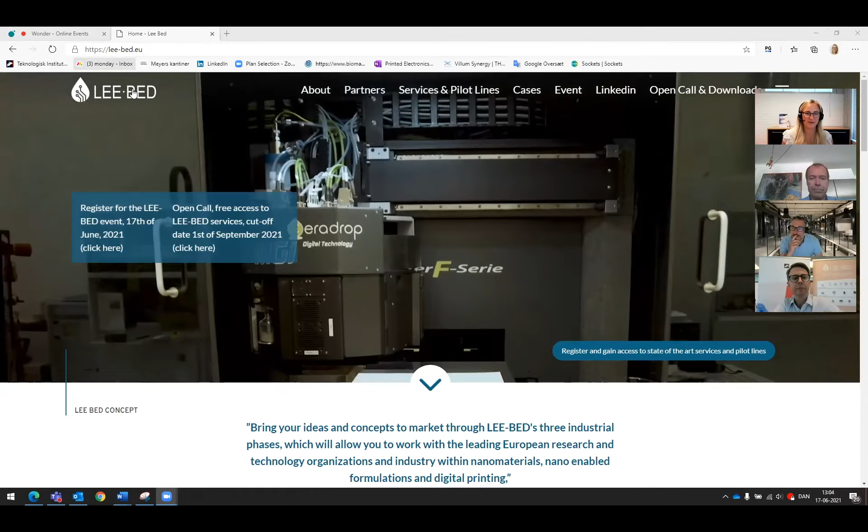You have probably been in here to register for the event. But if you would like to gain access to the LEE-BED service, the only thing you have to do is go here to the front page. Then you can register over here by this box, register and gain access to state-of-the-art services. Click here. And then there is this registration form you have to fill out: your contact name, the company, your mail address, and a short description of your idea.

Then there is 4 more steps: how mature your idea is, what you wish to accomplish with the help of the LEE-BED support, and how big your company is. You are also able to upload a file here, and simply submit. Then we'll come back to you.

I know that Zachary Davis in his talk will also come into further detail what you can gain from this service. Another thing I also want to mention is we're gonna have these networking sessions.

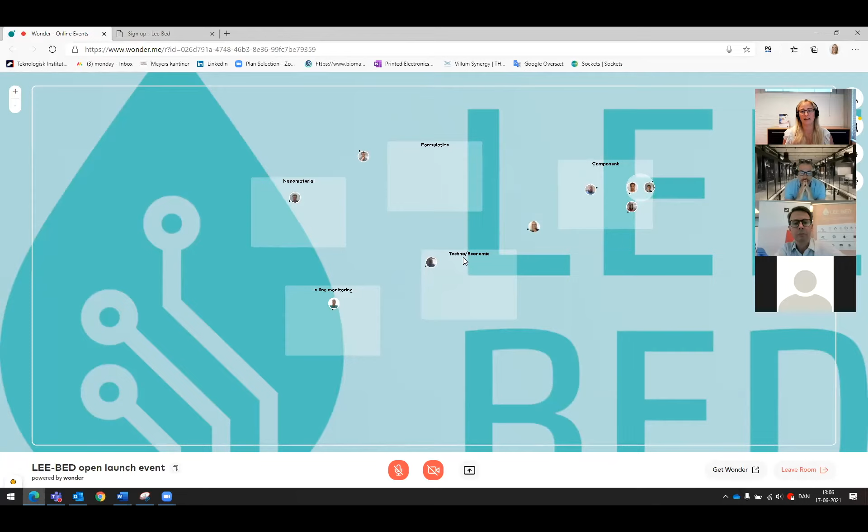When you enter this, you'll be asked which company you're from. Just type in your company name and access. Then you will see a table like this. You can zoom in and out here to see anything further. We have 5 areas where experts from this area will be able to answer your question and network with you: nanomaterials, formulations, component, line monitoring, and techno and economical services.

If you want to speak with a specific person, you can go over here and, for example, find a specific person in the participant list. Then the screen lights up and I can find Christian here, for example. Then I can go over to him or invite him to my circle. And a ring forms around and we can start to chat.

Hi Christian, you can maximum be 15 people in a circle. So if you go over in one of these areas and the circle is already full, an expert will enter your circle and start a conversation with you. So don't worry about that.

You don't have to be inside one of these 5 areas to have a conversation, but the experts in these specific 5 areas will be in these areas. If you go to the bottom of the screen, you can turn on your microphone and your camera. And if you go to the right side, you can change your audio input and your video input as well as your name.

You can also chat with people in this networking. You can chat with the people in your circle, send a private message, or write to everyone. We have 3 networking sessions: one after the first talk, then another one after the second and third talk, and then one at the end.

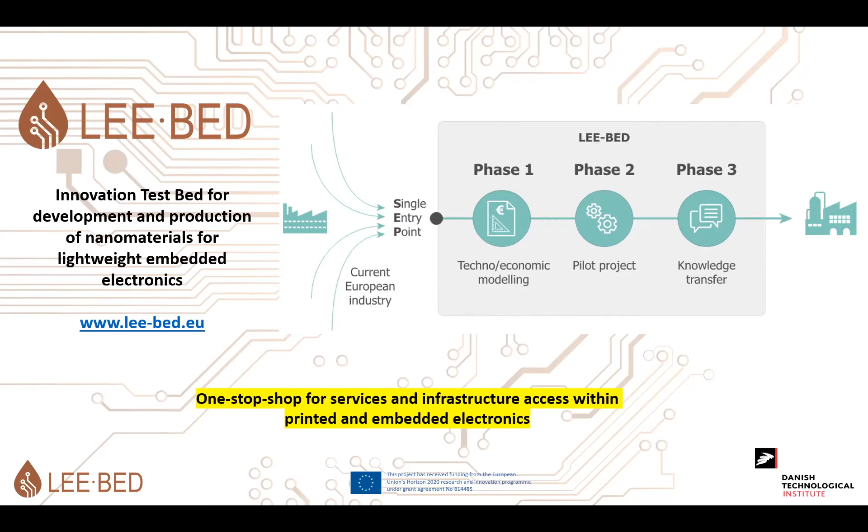It's actually quite a few partners, as you see here. We have 13 service and pilot line providers spread across Europe, in quite a few countries, and you can see them here.

I also want to emphasize the pilot projects, or the types of pilot projects. We have many different types of pilot line technologies: nanomaterials, formulations, component printing lines, of course. We also have a lot of inline characterization and testing facilities in order to understand what we're doing, because it gives feedback to the different pilot lines, etc.

This requires a lot of organization, but this is what LEE-BED has done. In order to facilitate the development of the services and the upgrading of the pilot lines that we've been performing over the last 2.5 years, we have 4 end user cases.

We have Swarovski, Maier, Graphiatic, and Axion. I'm not going to say much, because they're going to come and tell you themselves what they are doing, what they're interested in, and how LEE-BED has assisted them in their development and innovation process.

So just a little bit about the LEE-BED journey. You go to the website and push the button. But what happens after that?

Well, in principle, the LEE-BED services work such that most of the contact goes through the single entry point, which is DTI, which is us, and also a project manager. The project manager gets assigned to you shortly after you come into the single entry point.

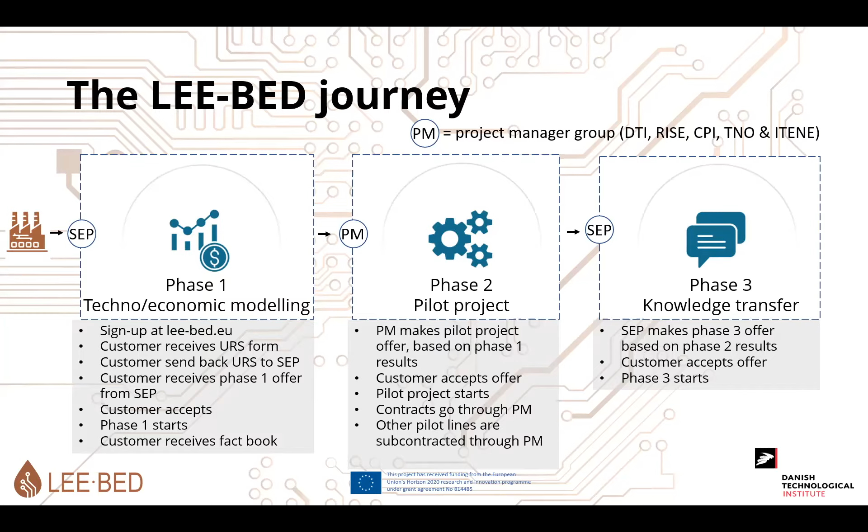The phase 1 services, to go into more detail, we have 6 services. Technical assessment, which is mandatory, because we need to understand what the customer wants to do, what the technology readiness level is, and what the ambition of the customer is. Once that's finished, there are several other services we can do: safety, economic, LCA, patent mapping, and if needed, pilot project financial support.

Pilot project financial support - I'm not going into too much detail, but this is a service for small companies or SMEs that don't have much capital, because using the pilot lines you're going to see, they're not inexpensive. So if you need help getting support for that, we can help you with that. Just a short description of each of the services now.

The technical assessment looks at the technical feasibility within LEE-BED. Can the LEE-BED expertise and pilot lines provide a solution for the client? We look at the risk level - does it require inventing a whole new material system from scratch, or can we just take things off the shelf and mix and match what we have?

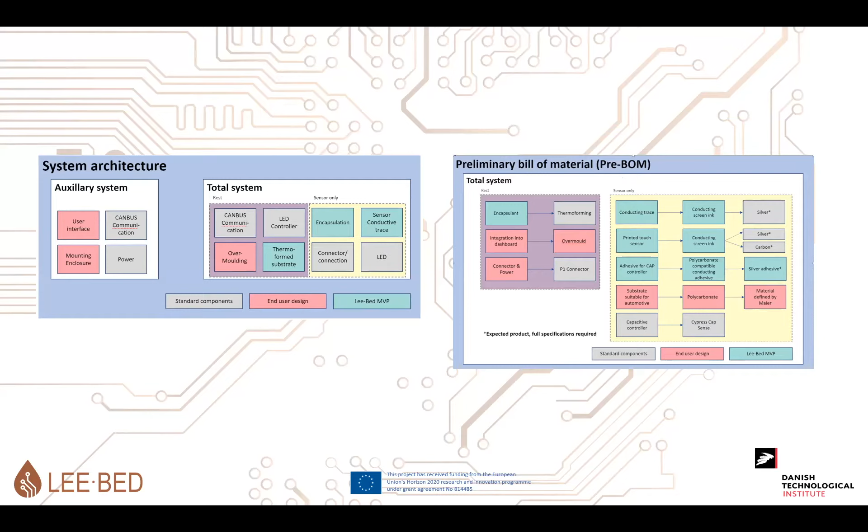Once we've done the technical assessment, we go back and use that data to carry out the other services. We can do an economic assessment, because at the end of the day, the product you envision probably has a cost target. Can we meet those cost targets, and how? We can look at both the material properties and cost, but also the production cost using different production possibilities.

These are things we can do - we can look at the risk involved, and we can also develop a preliminary business model canvas, etc. So this is something we can do as well, because it's not just about looking at the technical solution, which is important. Sometimes we also need to understand how much it's going to cost, and what the cost of the product or innovation will be at the end of the day.

Preliminary safety screening is also quite important. We need to understand if there are any risks, because in many cases we're talking about printed materials which consist of nanomaterials. So we need to look at the regulatory aspects of those materials embedded into the printed product. We have TNO, experts in this area, who are really good at doing toxicological and ecotoxicological testing. We can also go a step further and look at the electronic components themselves - there's a lot of standards in the mechanical and environmental properties of these things as well, so we can take a look at that.

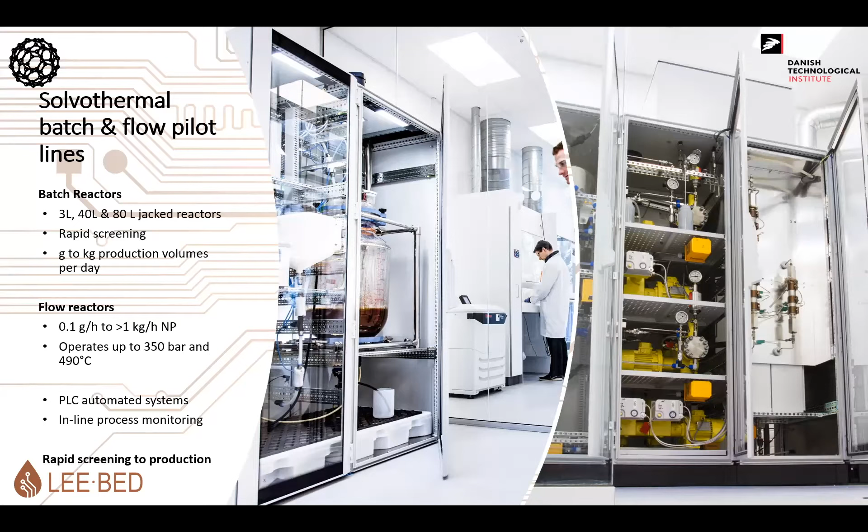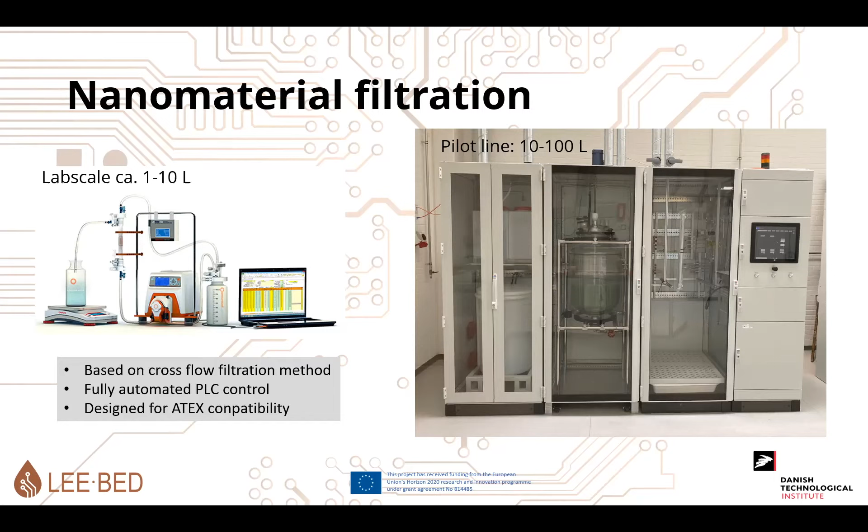Another thing we're looking at is not just the actual production, but also the filtration, because that's a huge barrier. Once you've produced, let's say, 100 kilos or 100 liters of nanomaterial suspension, you also have it together with a lot of byproducts that you need to clean. Cleaning 10 liters you can do with a centrifuge, but cleaning hundreds and hundreds of liters in a production facility is quite tedious and time consuming. So what we've done is taken what we call cross flow filtration, a bench lab scale unit doing this type of thing, and upscaled it to a production level tool. This is something we just finished - I took this image yesterday, and we're testing it now. We plan to validate the process within the next couple of weeks.

Some of the materials we've been working with: copper, silver nanoparticles, silver nanowires. I didn't have a picture, but we just had a breakthrough being able to also produce copper nanowires now, so this is quite exciting news for us. We're at the very beginning of this, but we're trying to review this discovery. We're looking into hybrid materials - carbon with metallic embedded particles, dielectric materials, ferrite and magnetic materials, oxides, ceramics, etc. We can do quite a large variety of materials.

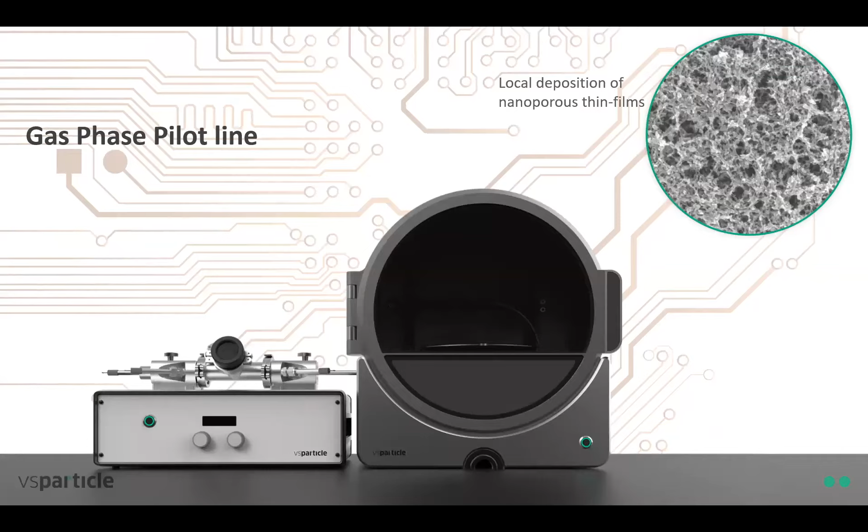We also have another pilot line, made through our partner VSParticle, looking at a gas phase nanomaterial pilot line. Basically, it uses a spark ablation process, which is able to take a bulk material, or more than one bulk material, using spark ablation to aerosolize or make small nanoparticles, and then a flow system, an airflow system, to carry the particles and deposit them onto a surface. In this case, what you get is a local deposition of your particles onto a substrate in any pattern you see fit.

This is very interesting, and these are used for sensor applications, gas sensing, maybe CO2 or CO gas sensing, and other interesting applications. This is just showing you how it works. The pilot line is actually up and running, so if you'd like to take a look, please contact them for more information.

If we go on to the next type of nano-enabled formulation pilot lines, we've done a lot of different things. I'm just going to give you a few highlights. One thing that's pretty interesting, and one we identified as a LEE-BED innovation, is trying to bring down development time. This is work done by CPI in the UK, combining AI and robotics to optimize the development phase of making a conductive or nanoparticle type ink.

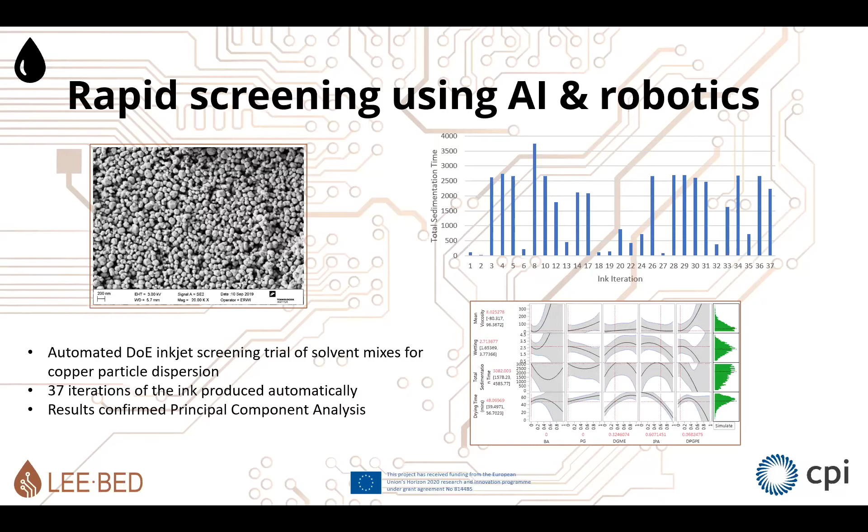What they're doing here is taking particles, in this case copper particles from one of our nanomaterial pilot lines, and conducting an experiment to find which solvents and materials are compatible with the particles. We did design of experiments and used CPI's robotic capabilities to both mix and test many different ink iterations, then compile a list of which particles are compatible with which solvents. This helps us go quicker to inks that are more stable and work, that can then be developed into real inks used in the pilot lines.

We've continued that work, and based on it, developed a few different types of inks, including an inkjettable ink, which is used by us and other partners to make some components. Copper in this case is a cheaper and much more sustainable material than silver.

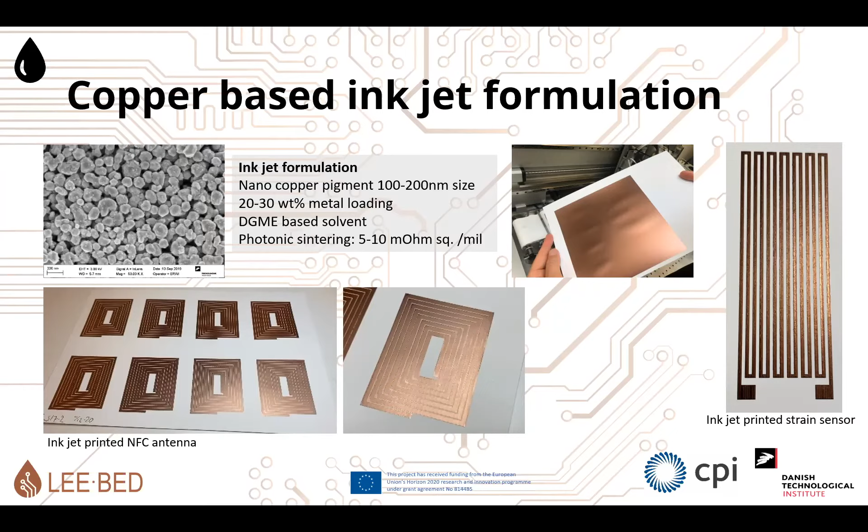We also have RISE working on zinc, which is an extremely nice material because it's quite cheap and sustainable compared to silver. They've also been able to achieve a nice, stable, conductive, inkjettable ink, and they're using it in their own pilot lines and printing lines, as you'll see in a minute. This is a very nice alternative to some of the other materials we've been developing.

We also have Athena working on different types of color-based inks. This could be interesting for packaging, for example for gas-specific indicators, or for temperature, humidity, or pH. You can use these color-based inks to give a visual indication of what's happening, which is very nice for packaging.

On top of inks, we also do other things. Formulations is a broad term, so we're also looking into adhesives, because when working with flexible plastic foils, you cannot use standard soldering technologies—soldering onto a plastic foil will just melt it. So we use conductive adhesives, or glues, which CPI is also looking into. In order to attach dies, we can develop both anisotropic and isotropic adhesives for mounting different dies, and this also ties together with some of the production pilot lines, as we'll see in a bit.

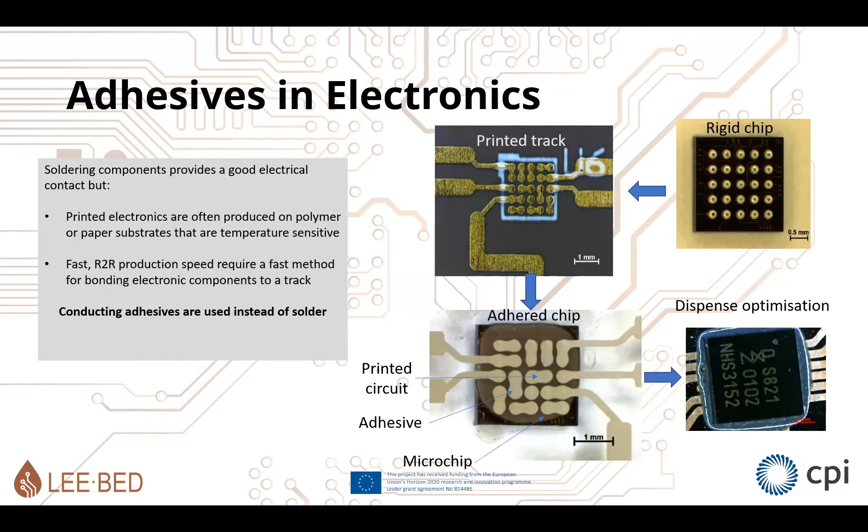We also look into nano-enabled resins, making composites with tailored functionalities based on introducing nanomaterial. This could be for EMC shielding, or for other things like antibacterial effects, and there's a lot of different applications—also thermal conductivity, this type of thing. So introducing these kinds of properties is something we're working on as well.

The last type of pilot line is these component pilot lines. In this case, we have quite a few tools to play around with. We have quite a few partners with different types of equipment, and we try to characterize them into two categories: one is prototyping and small to medium scale production, and the other is the more production-upscaling technologies where we're talking about roll-to-roll or large sheet-to-sheet equipment. So just some examples of that.

Both DTI and RISE have inkjet printing technologies and capabilities on the sheet-to-sheet level, which is very nice for testing new inks, for prototyping, for doing small scale studies, working with different materials. This is just some of the things we can do, or some of the equipment we have.

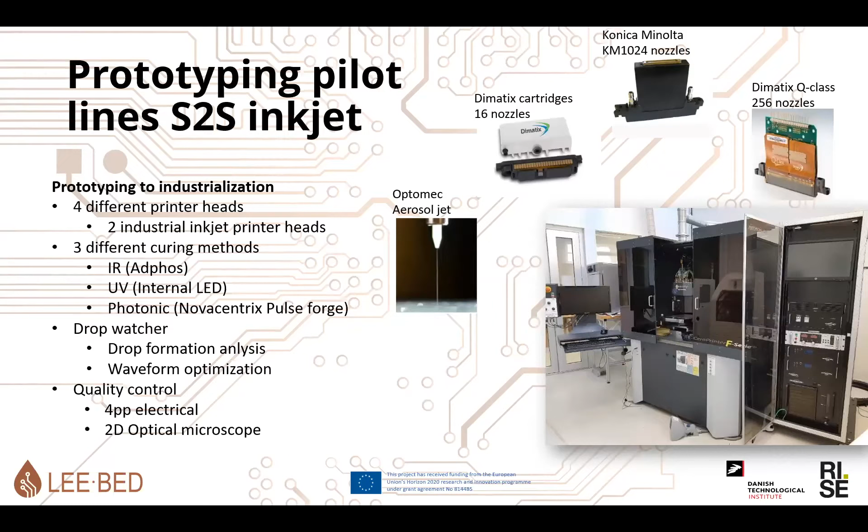This is just some examples of things you can do with this type of technology. You can print coils, touch sensors, humidity sensors, strain gauges, thermocouples, you name it, we can try to do it. You can work with different technologies, different materials, and I'd say this is very nice because you make a design, you start to print, and maybe within a few days you can start to test it, making this a very fast iterative process to optimize design, look at different materials, etc.

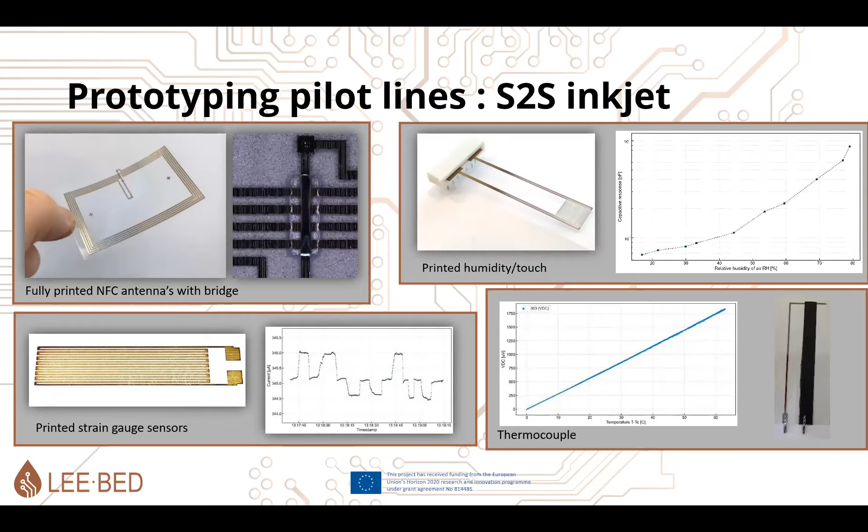Another really exciting innovation in LEE-BED is this 3D multi-material technology. This is done by TNO and Holst. It combines conventional 3D printing with also some conductive materials, etc.

This is an example where they actually use SLA printing to print cavities, and then they filled the cavities with components. Then they printed grooves and filled up the grooves with conductive, in this case silver, paste. And then they encapsulated it with the 3D printing technology. So in this case, it's a fully embedded passive temperature logging system, fully 3D printed.

And this, of course, is getting more and more mature. So in this case, you can really think about truly 3D electronics using this type of technology.

We also have these sort of more large scale or large area printing systems. These are some examples of sheet-to-sheet screen printing, where both TNO and RISE have this type of equipment. We also have RISE developing a large area roll-to-roll inkjet printing system. Basically what they're doing is converting an old poster printer to a printed electronics printing system. Extremely exciting - you can really make big areas of printed electronics on a poster format.

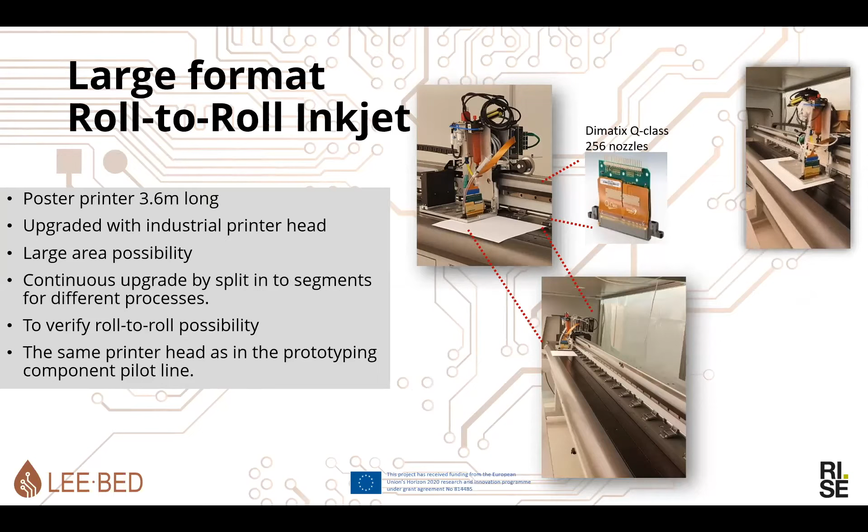This is really cool. We also have roll-to-roll technologies: flexographic, inkjet, and I think also rotary screen print. In some cases it's not written here, but we have that within the consortium. So we can really go up to industrial production volumes when we want to do that.

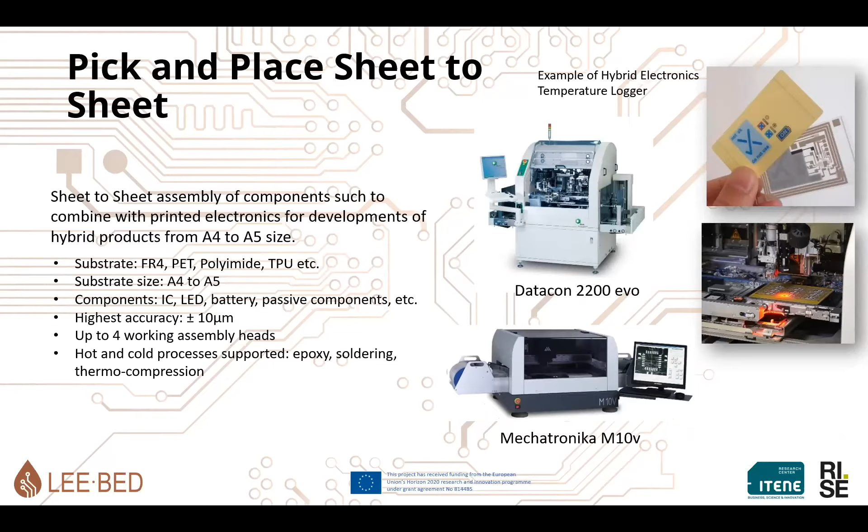Pick and place systems, of course, we have sheet-to-sheet pick and place systems. If you want to mount temperature sensors, capacitors, resistors, or microcontrollers, this is what we need. And last but not least, the big brother to that is a roll-to-roll assembly system.

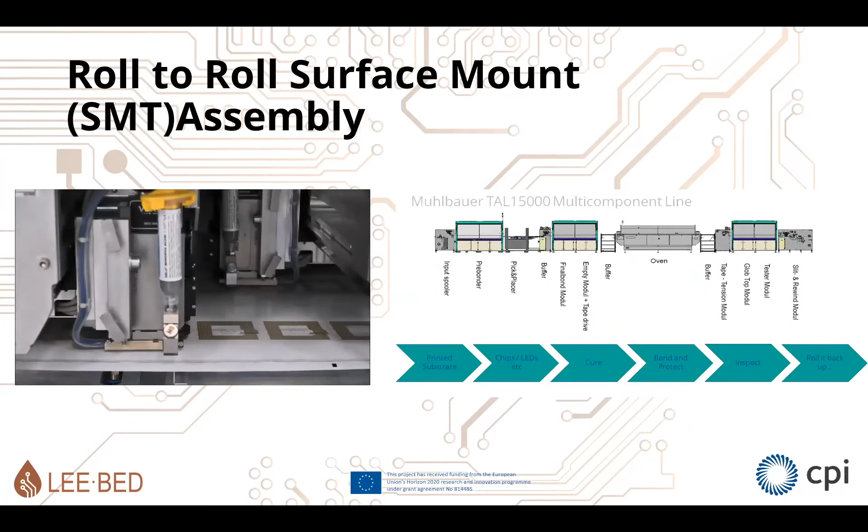This is a system that CPI has developed and has been developing for many years. This is a really interesting line - basically you can take your roll-to-roll print, put it onto the roll SMT assembly system, and then do your mounting on a roll-to-roll frame instead of a normal sheet-to-sheet process, which is what's done today. Extremely exciting technologies.

The last thing I wanted to show you is also the embedding part - actually making and printing components, but also then embedding them using resin infusion systems is also something we're looking at. If you want to do this, I think it will be more evident in some of the applications we've been doing, so I'm not going to take too much time on that. Just some examples that have been fabricated by CPI.

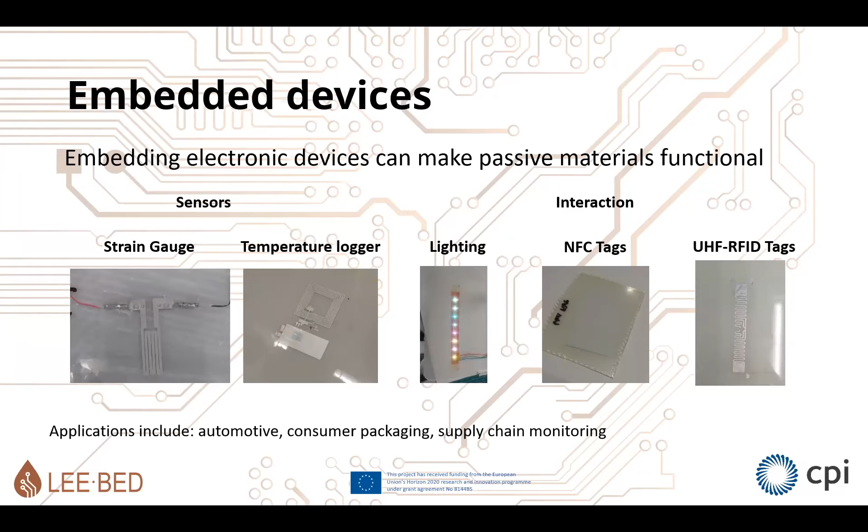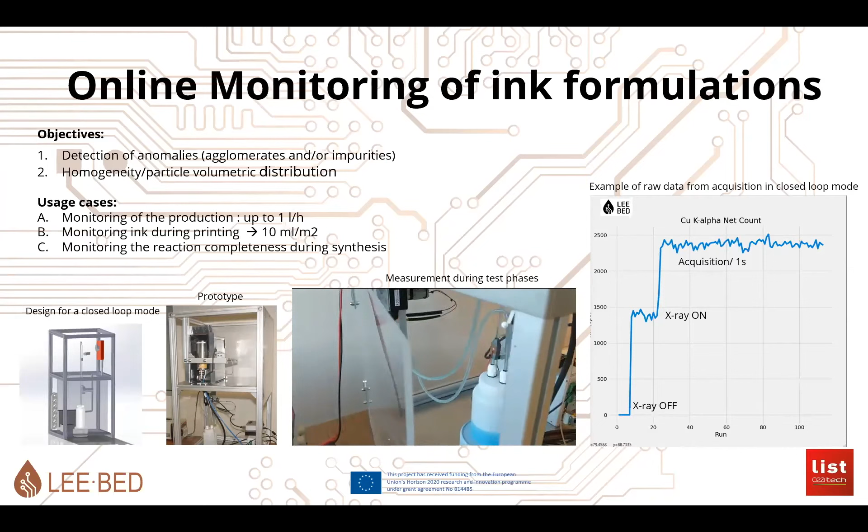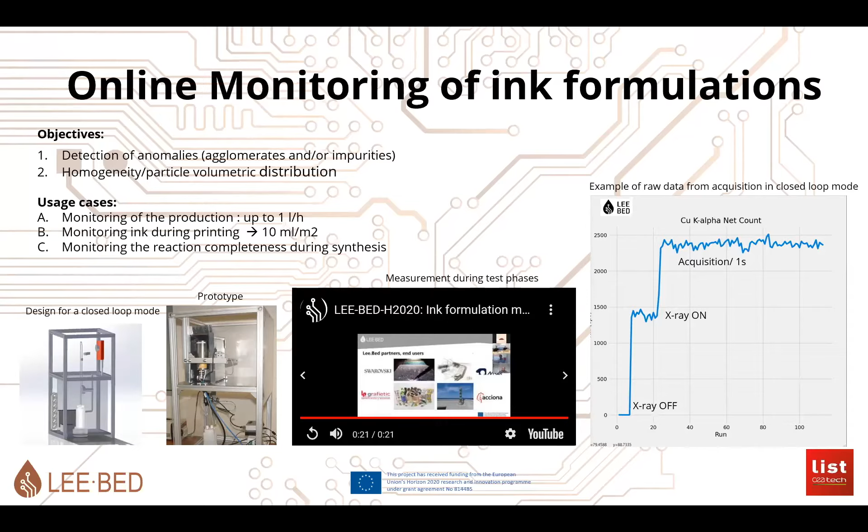I also want to mention a little bit some of the online and inline monitoring systems we've been working with. SIA List has been working on an XRF system that can act as an endpoint detection for our nanomaterial pilot line. This system can monitor the difference between a copper salt, a copper ion, a copper oxide, and pure copper particles, so we can use it to monitor the product as it's being made, and then we know when we're finished making our particles.

We also have roll-to-roll automated test lines. This is both CPI, and I think also ITENE is looking into this. So once you have made your products, if you have tens of thousands of them, you need to test them. We can have automated test lines to do that, so you can program or test using these types of technologies.

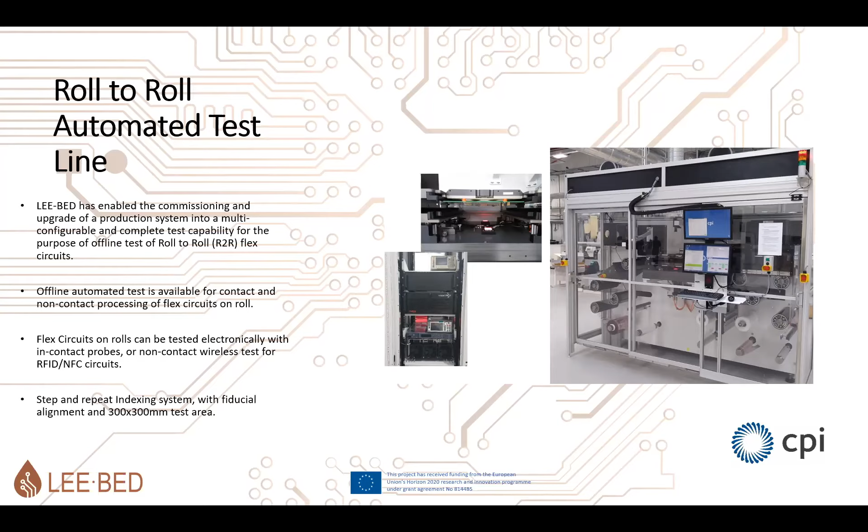So this is giving you more of all the capabilities. And of course, the last phase is the knowledge transfer. I'm not going to go into too much detail here - these are services that are being formed and developed as we speak within LEE-BED, so more information will come in the next half year or so. But these cover things like IPR and patenting strategies, standardization, safety, business planning, investor capital access, etc.

And with that, this is basically a very short overview of what LEE-BED does. If you want more information, please go to our webinars, both the PDF versions and webinar versions, on our YouTube. Please do that. And the last thing I want to show you is the open call.

This is basically what we are doing now. What we want to do is we have now matured the services to a point where we want to open them up and give the chance for external industry to come and use our services. So this is what we're doing today - we're announcing our open call.

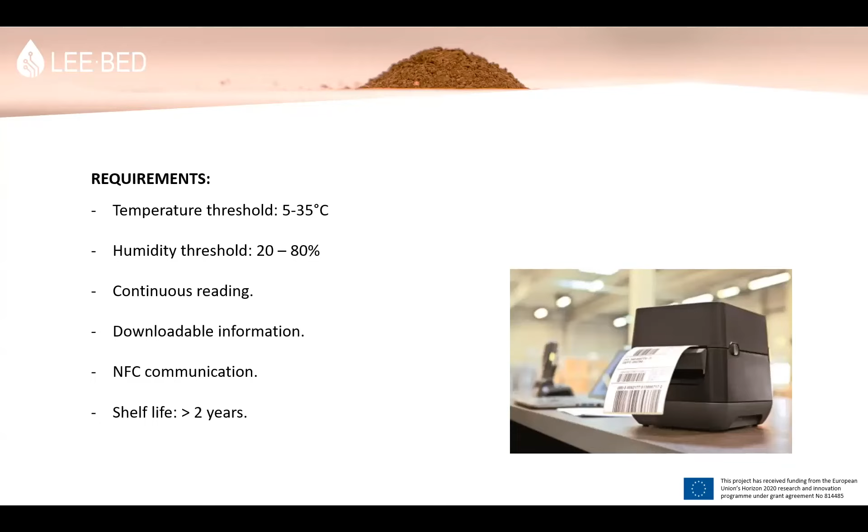Humidity threshold, 20 and 80%. Continuous reading: the data will be read every 30 minutes, and the information will be downloadable, and the communication will be with NFC. The label will be placed on the goods, so the dimension should be different depending on the printer. And the shelf life is more or less 2 years.

Ribbon is a transparent polyester film in which a mix of wax and resin is placed on one of its faces. When it comes into contact with the printhead, it heats up and melts the mixture, depositing on the adhesive label. We sell hundreds of thousands every year. The ribbon and label stocks must be carefully matched to each other and to a specific application in order to receive optimum quality and durability. We usually offer a guarantee of 1 year for this kind of printers.

What is the problem? Some of our clients don't use the ribbon of our printer. They use ribbon for other trademarks. In those cases, the durability of the printer can be drastically reduced. At this moment, we cannot identify if our customer has used our ribbon or other, and this fact causes us economical losses. We want a solution that allows us to detect that other ribbon has been used, and in that case, we could demonstrate it and cancel the guarantee.

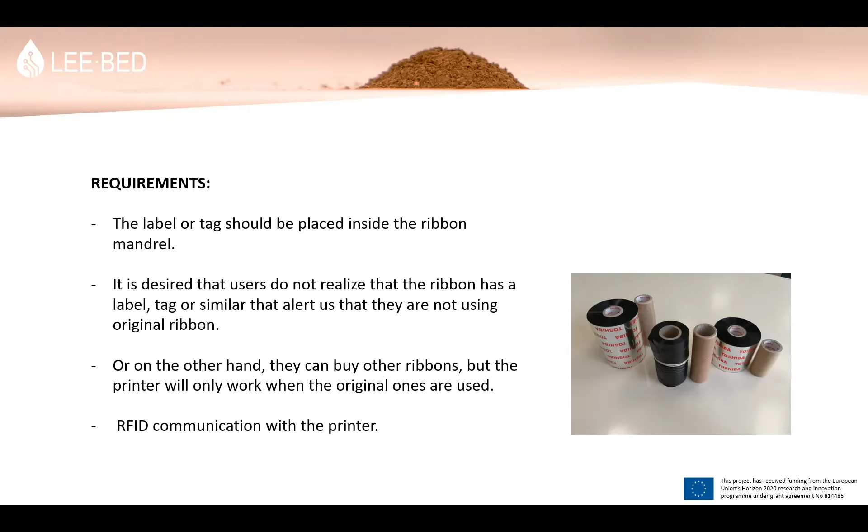If it's placed at the end of the roll, it will be impossible to locate. Our printers have the option to work with RFID. It could be a good type of communication with the ribbon.

Now, phase 1, assessments. We presented our cases to LEE-BED. For that, we completed user requirement sheets. The information was analyzed and a project leader was assigned. In our case, Itene is the technical responsible of the development of our prototypes.

The technical viability was studied by Itene, based on the information from the URSs. The technical challenges are valid. At LEE-BED, a developed printing process to produce conducting tracks will be used, and commercially available components for the sensor application and controller will be integrated. While from the technological perspective, the idea is fully valid, the financial aspect is determined as a significant risk at this point. So, in order to reduce it, we contemplate the possibility that the labels could be powered by the printer itself. But we want to validate this idea with Toshiba when we have the printer prototypes.

Now, preliminary safety screening service. One of the services that was done previously to the pilot has been a preliminary safety screening service for LEE-BED partners, to easily find possible regulatory aspects about nanomaterials in any of the steps of the life cycle of the product. This platform also allows finding physicochemical and toxicological properties of nanomaterials, and offers a fast communication way to ask for different nanosafety services.

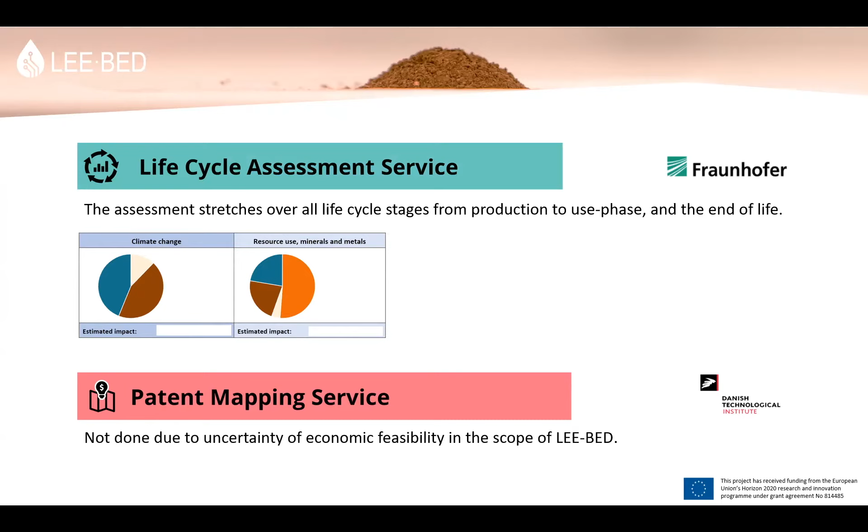Finally, the patent mapping service was not done due to the uncertainty of economic feasibility in the scope of LEE-BED. So what have we learned from this phase 1?

The solution is more expensive than our initial objective. There are options for printing NFC and RFID antennas using the facilities of our group, but they need to be studied. A list of nano safety tests is needed to guarantee the safety of our product.

An overview of the new business model and cost analysis, and an overview of the environmental impact from production to end of life of the product and how it can be reduced.

And now I'm going to speak about phase 2, the pilot project. The next step was the pilot project development.

We belong to a group of companies and we have the capability to print labels by different systems. Those systems are flexography, inkjet, and screen printing. Regarding printing electronics, each system has advantages and disadvantages. For example, flexography's advantages are speed and common use in label production, but its disadvantage is that the required conductivity is hard to achieve due to the low ink thickness of the system.

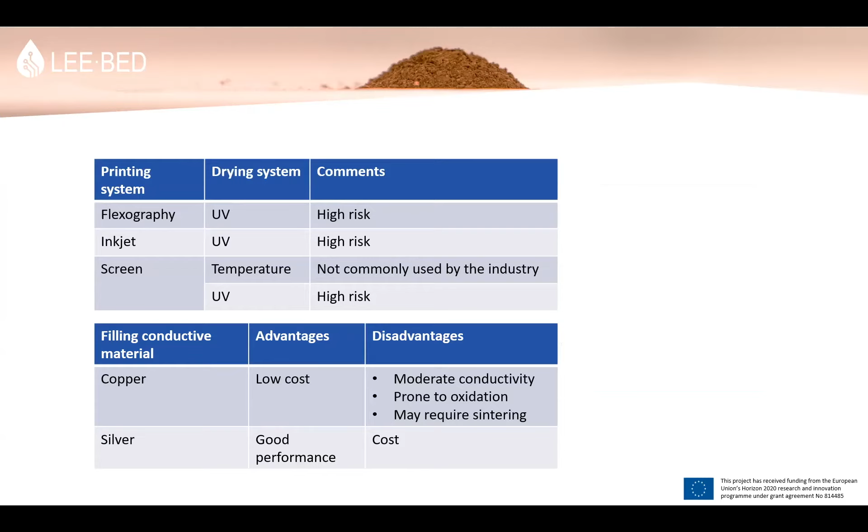At this point, for the development of the use cases, the partners are: the Danish Technological Institute is responsible for creating the copper nanoparticles that will be delivered to CPI. CPI will develop a UV curing ink to print by flexography, and Itene will print it, with the aim of having a low-cost solution printed by flexography using this ink developed by the consortium. It will also evaluate existing commercial solutions to give us alternatives.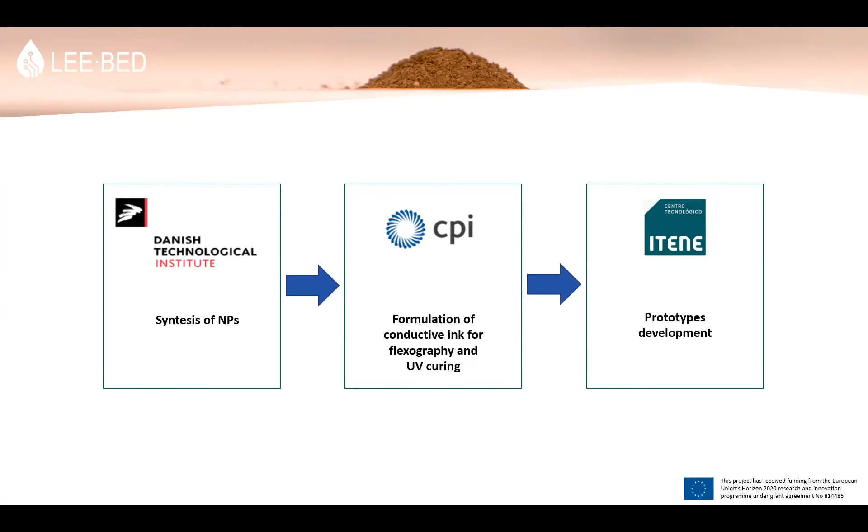Now, screen printing trials. Tests have been done in both screen printing and flexography printing to see what printing results we have. In screen printing, we have used three types of inks: a commercial non-conductive ink, a conductive ink with thermal curing, and a conductive UV curing ink. This is the one that interests us.

Analyzing the viscosity, it is quite different. The UV curing ink is higher and has a thixotropic behavior.

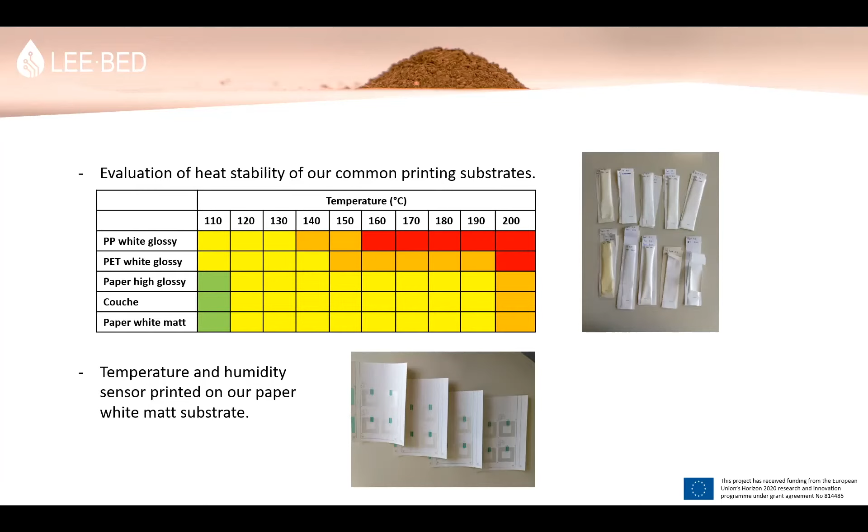At the end, we have printed the antennas on the paper white matt. And now, the flexography printing trials.

In flexography, we have done the same steps as for screen printing: a commercial non-conductive ink, a conductive ink with thermal curing, and a conductive UV curing ink. The thickness of the non-conductive and UV curing inks is quite similar, but the resistance is better with thermal curing. At the end, the print quality has not been very good, and it is necessary to continue working on it.

And now, what will we get out of this phase 2?

A price list of materials, the conditions in which these prototypes should be manufactured, and incorporation of new equipment that we will have to deal with. This information is important for phase 3.2, business plan services and investment capital services. Prototypes to validate the idea with our printer provider, and important marketing tools for our providers or clients.

And now, phase 3, knowledge transfer. Ongoing IPR and patent services, standardization and safety services, business plan, and investment capital services. These last two are ones that interest us the most.

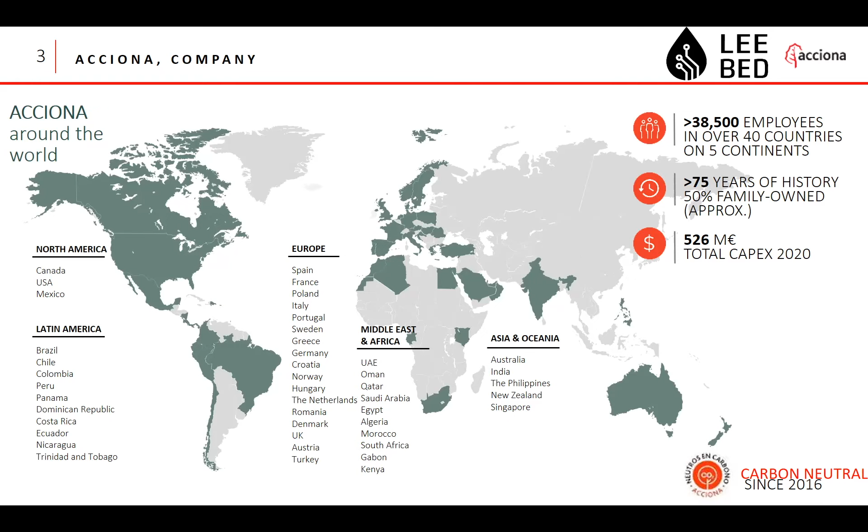Acciona has 3 technological centers: one in Madrid for construction, one in Barcelona for water, and one in Pamplona for energy. I want to focus on the Madrid Technological Center, which participates in the LEE-BED project. Here we are an international and multidisciplinary team of around 70 researchers involved in more than 50 projects at national, European, and international level. The center has 17 research labs and a production workshop for the production of large-scale prototyping. The objective of the center is the development of new technologies, materials, services, and processes with direct application in your business, providing a competitive advantage over other construction companies.

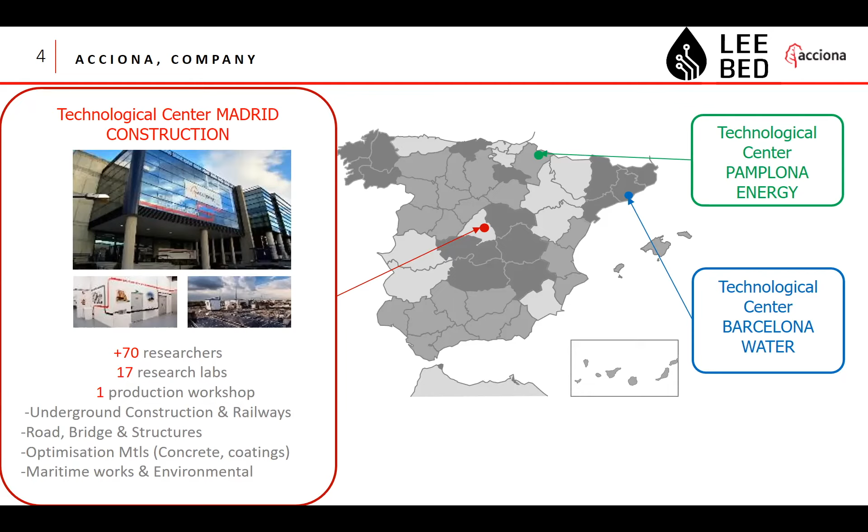This is one of the most significant structures to show the high durability of these materials in hazardous environments. And now I'm going to explain why we are working in LEE-BED and how we currently manufacture composite materials, and how LEE-BED will help us overcome those challenges to produce it.

In the manufacturing and installation of composite elements, we use different types of sensors. First, during manufacturing and post-manufacturing processes, we use temperature sensors to monitor and control process parameters. These sensors are long wires that we had to put along all the workshops, not connected to equipment. In this picture, we can see two processes where temperature is monitored: pultrusion and vacuum infusion.

Another step where we use sensors is during transportation and installation. We use tracking sensors to store information on every piece and keep traceability of the component. With a Bidi code printed on the sticker, the part is identified and traced.

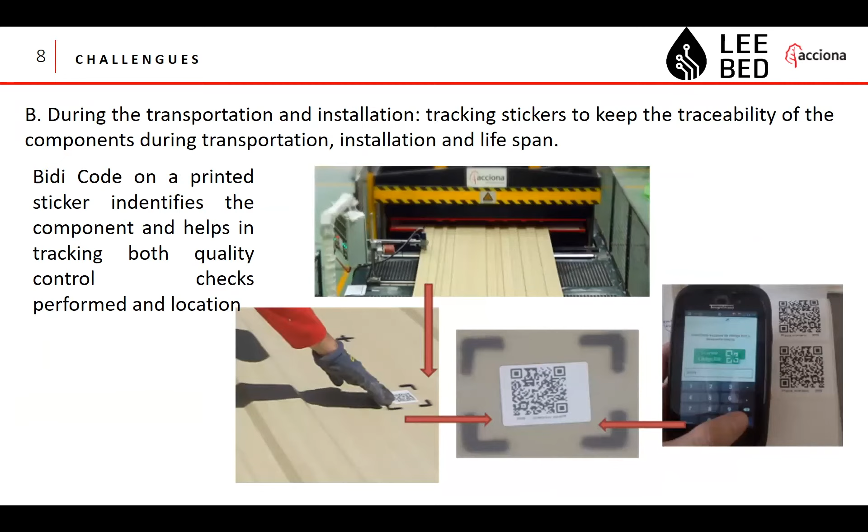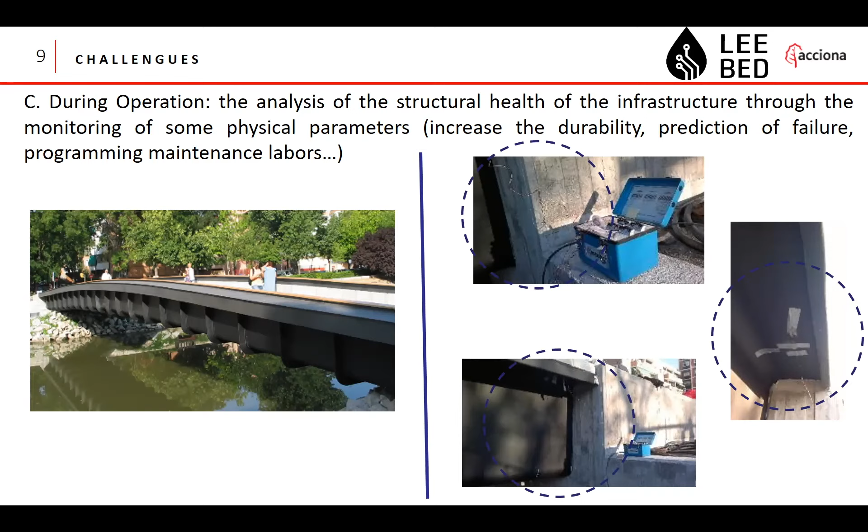The use of wire sensors during production poses some challenges for us. They're difficult to handle because they tend to be long wires with delicate connections. Because of the lamination, the piece with the embedded sensor must often be discarded, and the data reliability is not 100%. The same occurs with sensors for traceability - the adhesive can fail and the long wires can break.

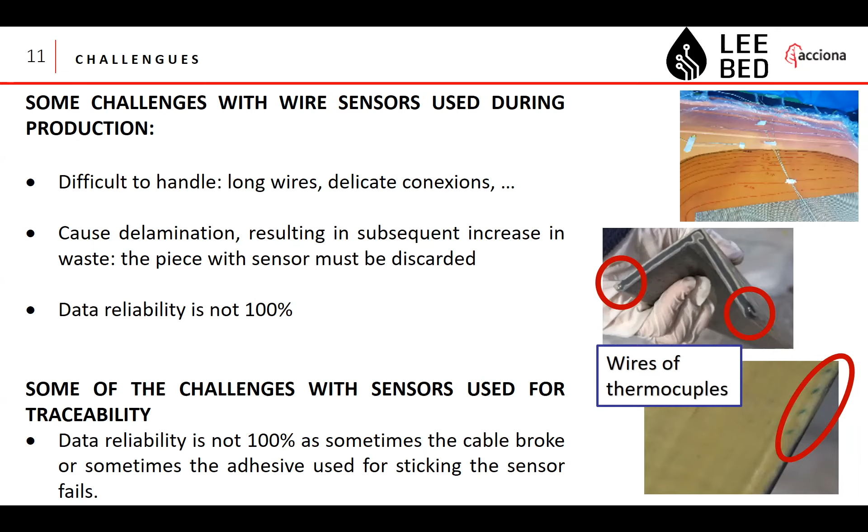In the LEE-BED project, the design and production of wireless sensors will substitute wire sensors and all their drawbacks. The solution proposed is the use of embedded printed sensors with NFC or RFID technology. This sensor must withstand the chemistry of the resins, the temperature of the process, and pressure or vacuum. The sensor should provide confident measures that allow in-function operation and a few meters of measurement range.

Specifically, the wireless sensors produced in the project for the Acciona case are temperature sensors and asset tracking sensors. The process used for incorporating sensors in components requires high temperatures and pressures, and batteries cannot survive these conditions.

So an energy harvesting design was developed. The temperature sensors are designed to operate up to 120 degrees to survive the resin curing temperatures, and the asset tracking sensors are designed to survive up to 180 degrees and are redesigned to improve resistance to pressure, because they are going to be embedded using pultrusion technology.

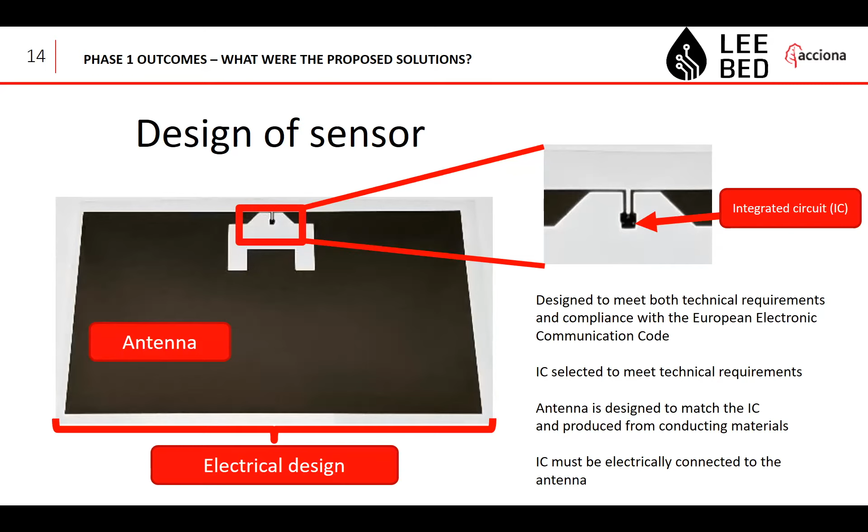The production of a sensor has 4 steps. First, to specify the electronic circuit design, design print screens and plates, and identify the materials required.

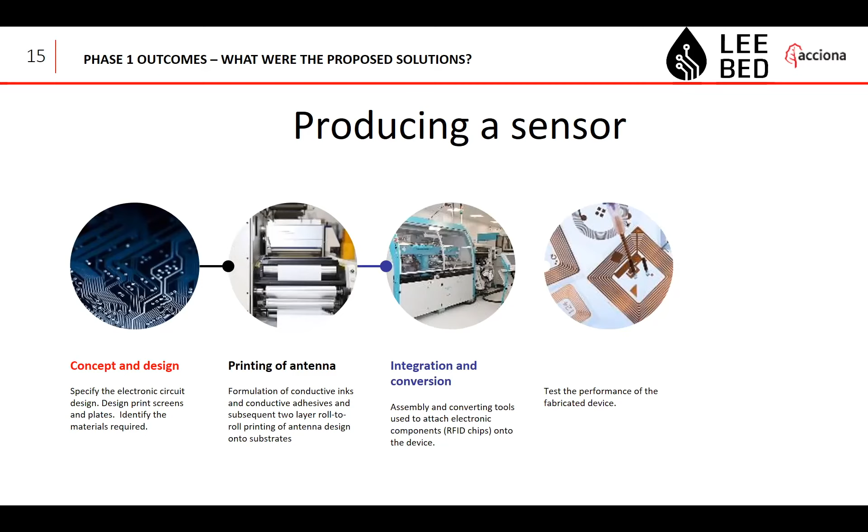Second, to print the antenna onto the substrate after the formulation of conductive inks and adhesives. Third, to integrate the electronic components onto the device. And finally, to test the performance of the final device.

In the assembly of the sensor, the conductive ink and the conductive adhesive must be selected to meet the requirements of the embedding process - as I said before, the high temperature, high pressure, and special chemistry. They also have to meet the requirements for the electrical conditions: the read range, the resonance frequency, and its function.

The results obtained at the moment are for composite production with vacuum infusion lamination, not with pultrusion. Only the temperature sensor has been used, with 2 technologies: NFC and RFID. The sensor has resisted the chemistry, the high curing temperature, and the vacuum of 150 millibars.

The first tests were made with the NFC technology sensor. During all the steps of the production - the lamination, the composite production - the sensors were working. And after 18 months from the lamination, as of last month, the sensor still keeps working.

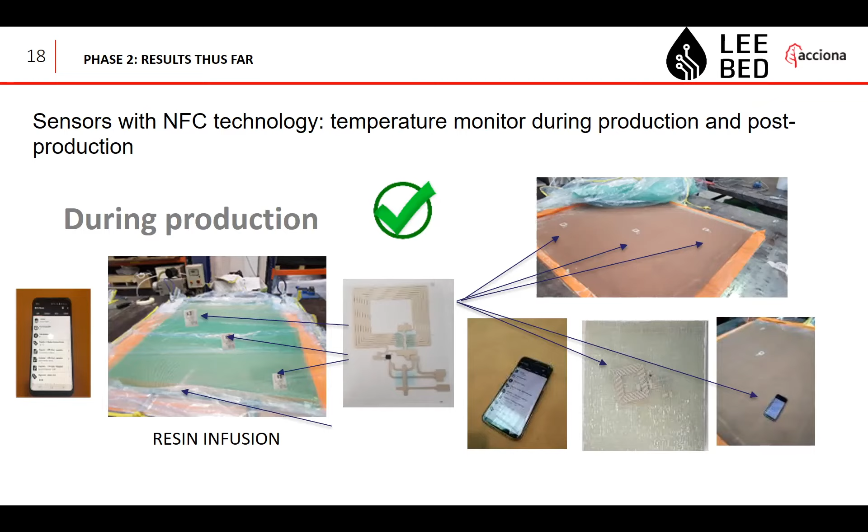After that, RFID sensors were produced to fit better in our requirements. They are embedded in lamination with 2 typologies of resins and 2 reinforcement fibers, glass fiber and carbon fiber. And as we expected, the sensors don't work with carbon fiber because it's electrically conductive.

In the lamination with glass fiber, the operation of the sensor is tested when the sensor is on the surface and when it's between glass fiber layers. All the sensors work. The next step in the project is the evaluation of how the embedded sensor affects the composite, and if the sensor resists the corrosive environment and the vibration of the structures where composites are located, in bridges, tunnels, and lighthouses.

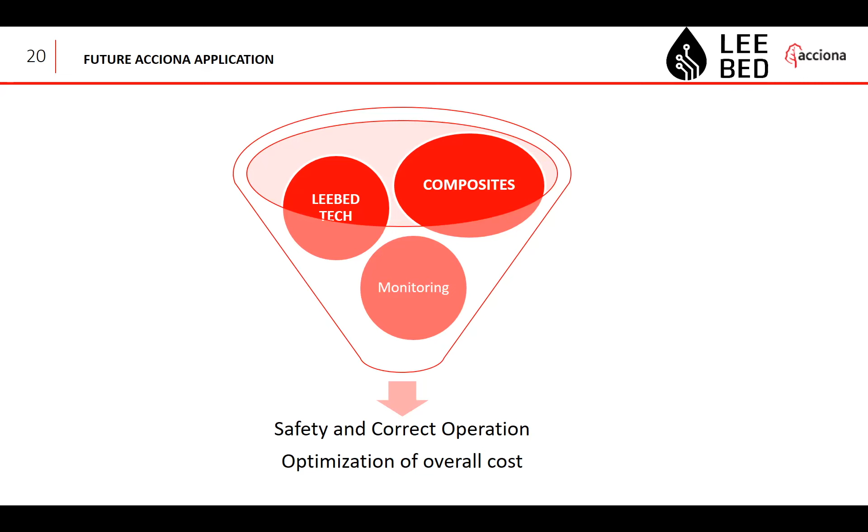As conclusion, the development of reliable sensors to be incorporated into infrastructures to monitor the behavior of the composite will allow Acciona to guarantee the safety and correct functioning of the structures with the optimization of global costs. That's all, thank you very much.

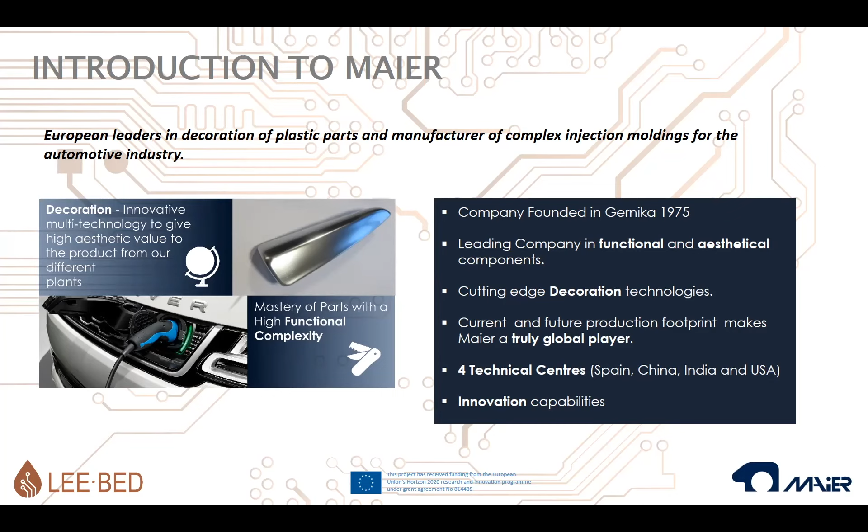Maier is a truly global player due to the latest joint ventures that we've got, and we'll see it in the next slide. We have 4 technological centers. The main one is in Spain, in the north of Spain, and we've got others in China, India, and USA.

In terms of main figures, our sales are going around 300 million euros, and we have a workforce of more than 2,500 employees.

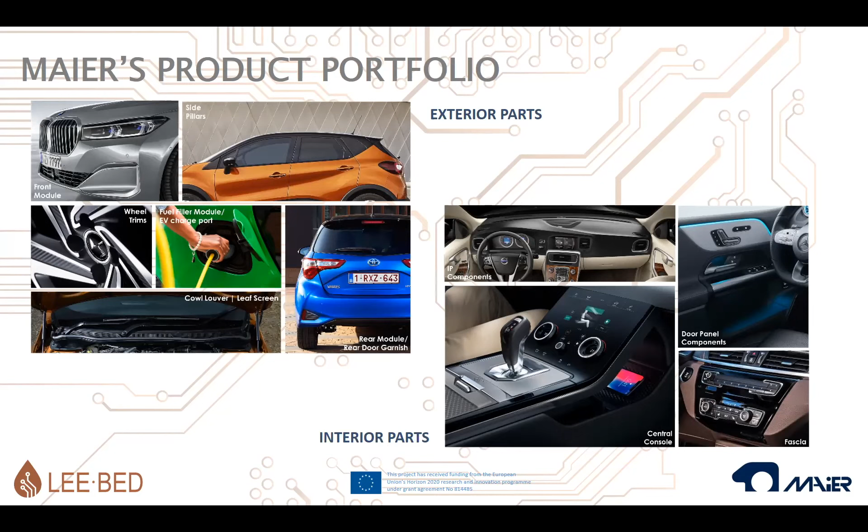What are the type of parts we produce? Our main portfolio can be split into different businesses, all of them in automotive, exterior parts and interior parts. For exterior parts, we are normally tier 1, meaning we develop, deliver and produce directly to the OEMs.

Our main parts start from the front module, front grills, fog lamps, and fog lamp trims, down to lower grills, side pillars between the windows, decorated parts, wheel trims, fuel modules or charge ports for electric vehicles, and for rear modules, some garnishes, emblems or trims to open the back door.

If we go to interior, we are normally tier 2, meaning we produce and develop for one tier 1 — for example, the one that makes the door panel. We produce, in this case, some aesthetic trims with functionality options for this door panel, the same for IP components, central console, or fascia environment.

If we go ahead to the challenge we want to solve in this LEE-BED project, our main objective is to obtain functionalities by overmolding flexible electronics in order to get a fully functional component that can be assembled without any process more than one part, instead of having different kinds of parts assembled together to achieve the functionality. The desired functionalities we would like to obtain are touch sensing, with the goal to replace mechanical buttons, and lighting in order to obtain new aesthetics through ambient lighting.

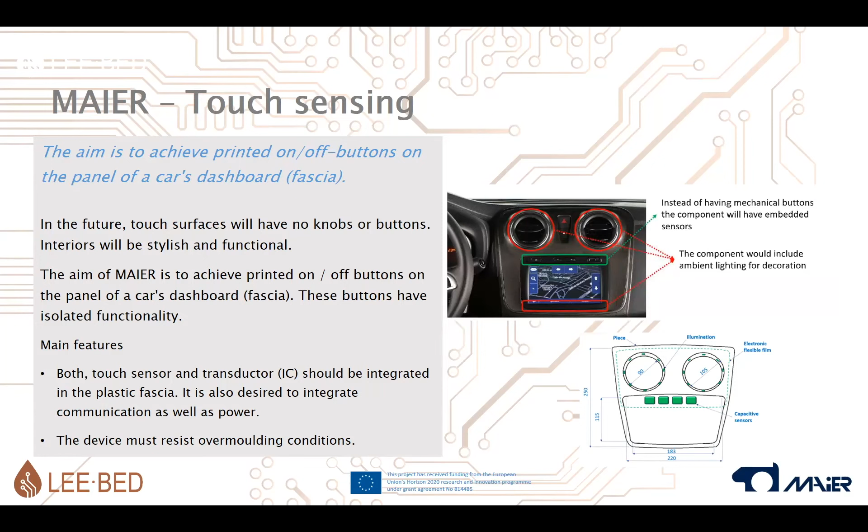If we go to the lighting, in this case the goal is to achieve ambient lighting on the same part, the car dashboard fascia. Lighting allows us to increase design options and create a personal lighting atmosphere in the car. This is an ongoing trend, more and more integration of lighting. So the idea is to have these LEDs embedded in the fascia, so in connection with the aesthetics or decoration, we can have new lighting decorated parts.

Now, in this case also, the LED and driver should be integrated in the plastic part, and the communication and power would also be desirable to have integrated.

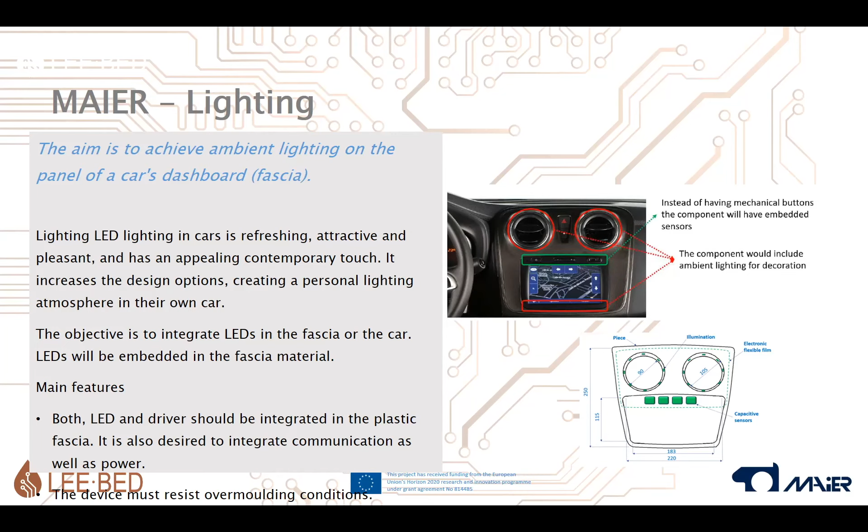After these challenges, if we go to phase 1 of the LEE-BED project, as explained in the first presentation, the technological assessment service is a mandatory service, one of the main points of services we have in LEE-BED. It's very important due to the evaluation of the technical feasibility and risk level of the development we are going to do.

Going more in detail about this feasibility and risk level, one of the first steps was to define the electric and electronic system architecture, the scope of the project: what we're going to integrate in the part and what is not going to be integrated.

So in this case we have some LEDs and also some sensing pads. The LEDs are controlled by a driver, and this driver must be connected with the car through a microcontroller and also a power supply. That's the functionality of the LEDs. For the sensing, the sensing pads need a controller, and this controller must also communicate with the car.

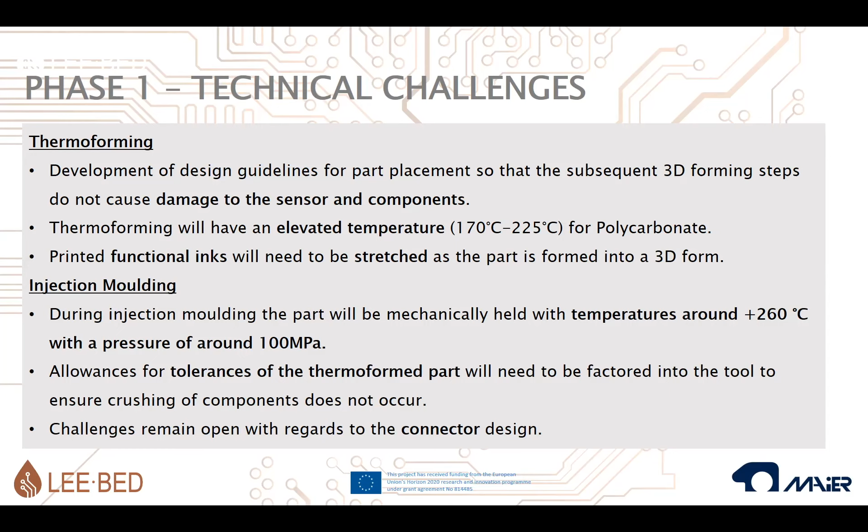Another service used in phase one was the patent mapping service, which allowed us to identify the relevant patents and the competitors working on these topics. Our goal was to create a map of technology trends, showing the solutions and competitors related to the development we are proposing in this LEE-BED framework.

A summary of phase one results.

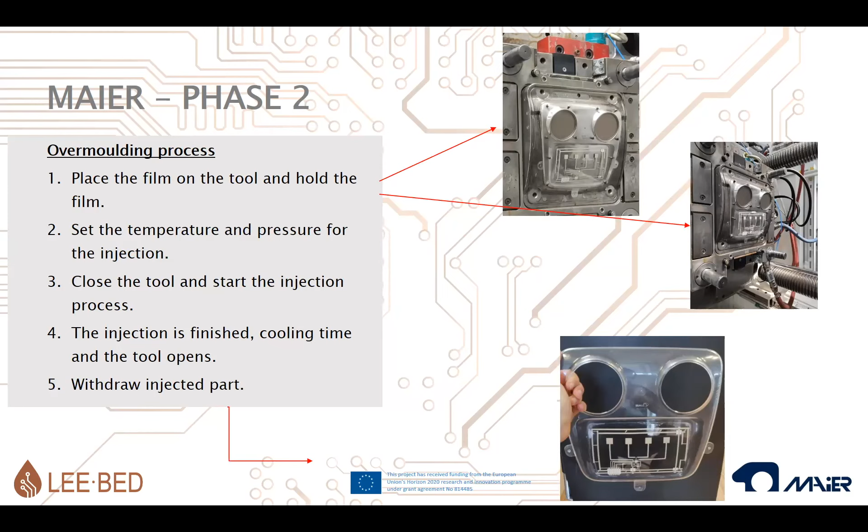After analyzing the part following this overmolding phase, we have to say that we had much better results with PMMA material, which was one of the materials used, instead of PC material.

At first, we didn't have any circuit degradation, so the tracks were okay. And in terms of components, we have different kinds of components, and the IC was okay, the resistors were okay, but we had some LED displacement problems or issues with these LEDs.

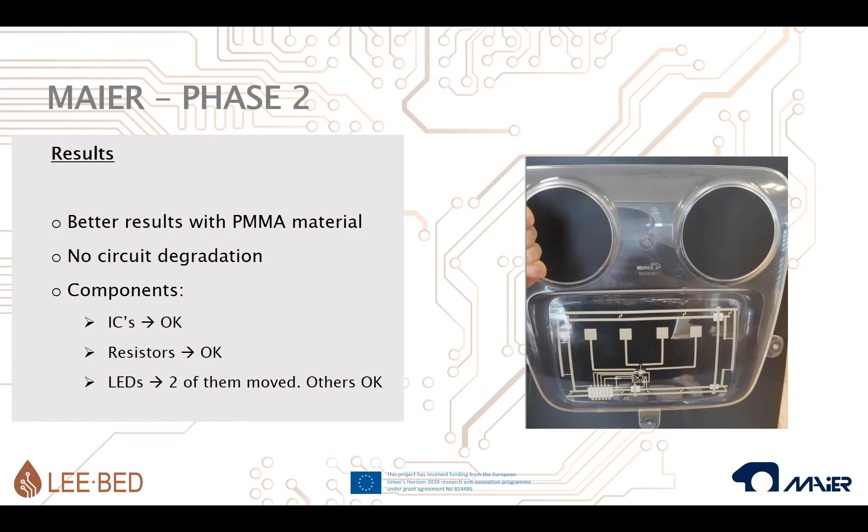There were some tracks that were melted or moved. There were some LEDs displaced due to the injection process, due to temperature, pressure, or flow of the material, and also the connector was embedded, so it was difficult to access, and that's something that needs to be improved.

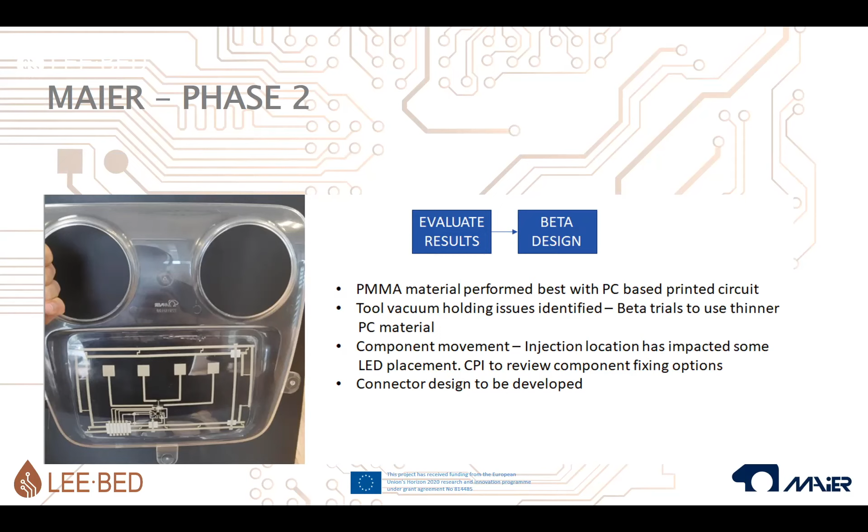So as a summary of this alpha phase, in phase 2, right now we are in the evaluation of the results in order to go to the beta design. This is part of the process we are going through, and we have some big issues or things to identify just to make improvements and go to the beta design. There was some risk and things to identify to be improved now. So we are right now going into the beta design until the functional demonstrator.

So as a final conclusion, we are still ongoing, and we hope to reach this final functional demonstrator soon, which will allow us to present to our customer these new possibilities and functionalities in order to propose new designs and different types of parts, not only in the first year. LEE-BED has allowed us to explore this new technology in order to see what the risks are and also which are the key points to be taken into account.

So that's all, and thank you very much.

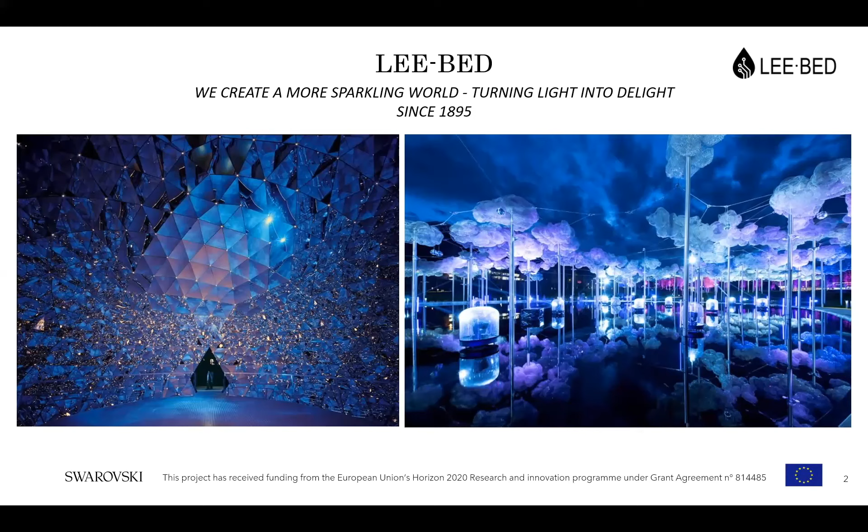This is really one of the major topics, I think, also for LEE-BED, where we are coming from. A more concrete one that also initiated certain thoughts about how we could use printed electronics for the benefit of our company is originating from the Designers of the Future Award art installation. Together with young designer Anjali Srinivasan, back in 2016, we did an art installation. I will just quickly show you a little bit what it is about.

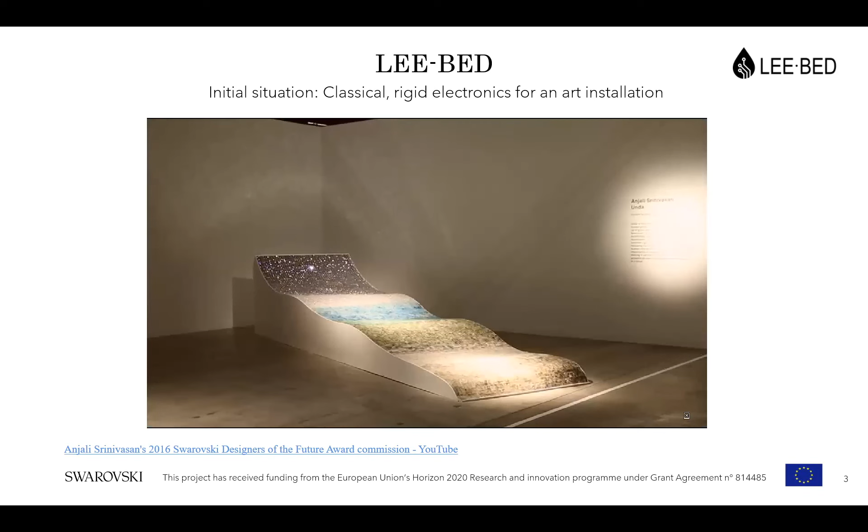No worries, there's no voice, so it shouldn't interrupt. Anjali is explaining the concept here, and as you see, we have quite a wavy structure with a lot of crystal on top of it. This crystal, as you see, might not be very classical, and it goes more and more sparkling in the upper part. The nice thing here is that we implemented it this way so the crystal got a functionality, and the functionality itself was that you really can touch onto the crystal. As we have seen mainly in the upper part, you can really try to write with your hand on the crystal surface, leaving certain light.

So basically what this shows is the combination of, on one hand, really touch interaction on the crystal, and lighting up the crystal underneath. As we have seen during this exhibition, it has been shown in different places worldwide, and the interest of customers in that was very high. But on the other hand, what we have also seen is that obviously this installation is very heavy, and it's quite bulky and big.

What we thought about is to go more for something lightweight, maybe something smaller, that could be embedded, for instance, in interior design. These were some thoughts where we met also with the LEE-BED project, where we said, okay, the concept of lightweight embedded electronics could actually help us realize new functionalities. Well, I'll go further.

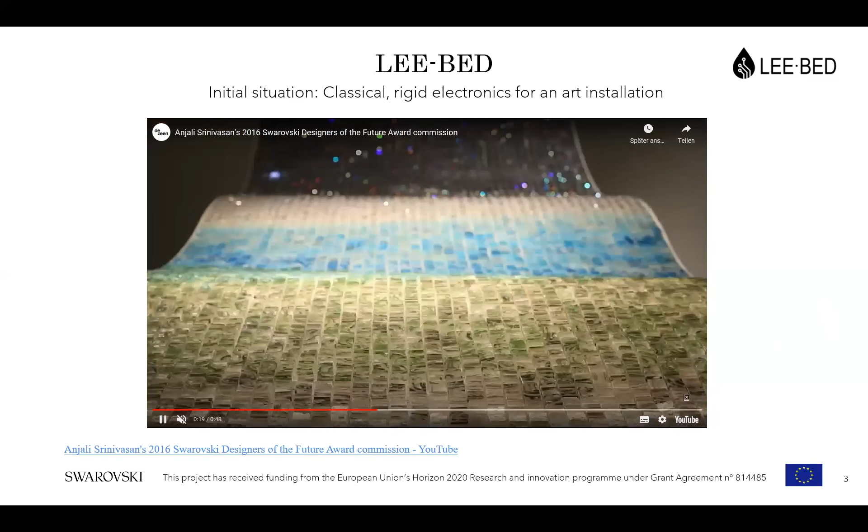So at the heart of our use case is really the touch interaction combined with the visual interaction. All this is based on a technology platform that we internally call the Functional Crystal Technology Platform. This uses specific crystals that have a specific coating on top, or at the bottom, depending on the usage that we apply. That allows us not only to have a decorative piece of product, but also to really integrate some functionality into it.

We thought further about where we can use this kind of concept, and we came up with three main domains, one of which is the most obvious one, maybe closest to our classical business: fashion and jewelry.

Coming from the jewelry part, with for instance a ring or necklace, going into fashion, where we have displayed color-changing crystals on a dress. What comes along with that is a requirement for more flexibility, more bendability, lightweightness, because we did tests with conventional electronics before, and it was always very difficult because the systems tended to be very bulky.

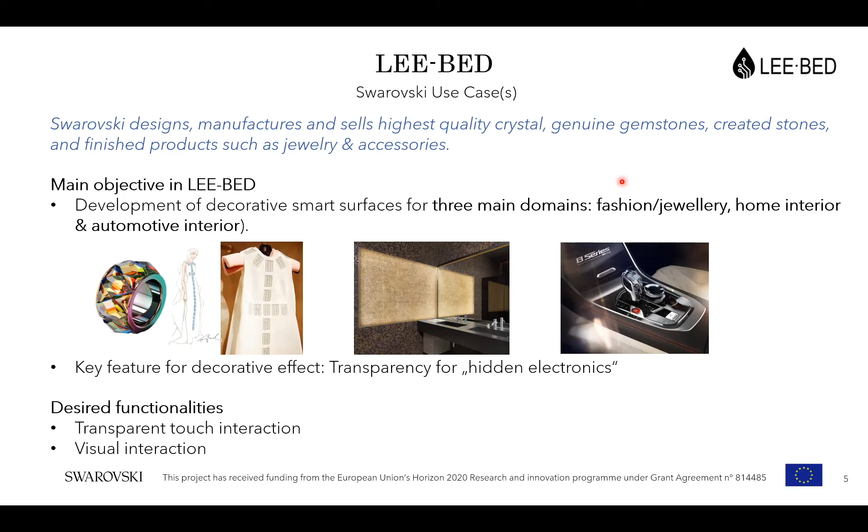If we look at how we structured all that, we took a little bit of a different angle than the other use cases. Very often we work with customers who we actually still need to inspire. So it's often the case that we don't work end to end on our own, at least for the B2B business, but we work with designers from other companies to inspire them and enable really new stuff, then move on in collaborations.

What we've also seen is that very often we need to initiate this kind of new technology push, because certain industries still don't pull enough of it, so that we can really create new applications out of the technologically already possible opportunities.

We split our LEE-BED use case into three types of demonstrators that are quite different. Demonstrator 1 is just a simple touch array, coming closest to the interaction we saw in the art installation. Demo 2 goes more into functionality, showcasing that we can have more than just lighting interaction and touch.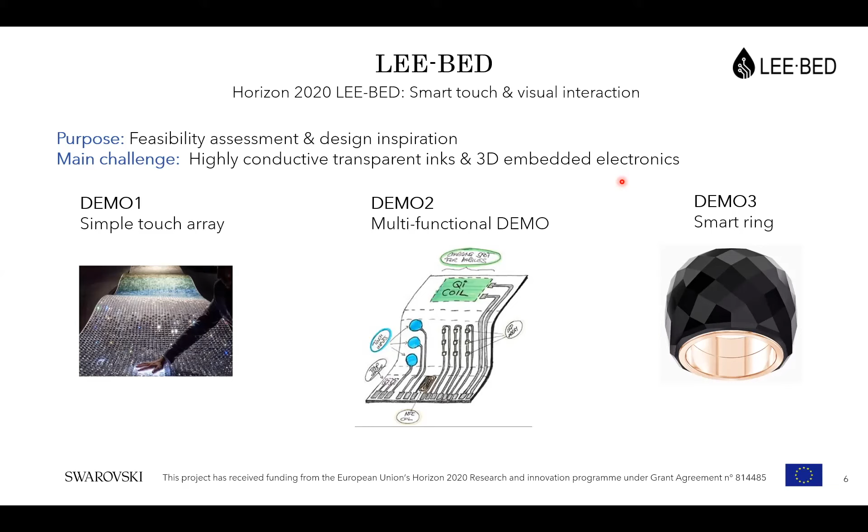Demo 3 explores something closer to our main business, jewelry—a demonstrator of a smart ring that can have further sensors involved, and is prepared by 3D printed electronics, so also by a different production technology.

Before we go into the technical details, and I'll show you some of the really nice demonstrators that have resulted from the LEE-BED project, I wanted to make the point that among the technological and economic services, what was very useful for us was a patent mapping service. Joseph before, and probably others too, found this really useful, and we can just encourage everyone to use this service.

The patent mapping service provided us with a lot of interesting insights. We had the chance to use two different partners that assisted us in carrying this out, DTI and Axia, and what they came up with was an in-depth analysis of different publication trends, a regional analysis of where patents arrive from, how this looks in terms of a timeline, where current potential competitors or partners for further development are, and what kind of patent groups, families, and keywords need to be considered. This was really insightful and guided us in making certain next steps.

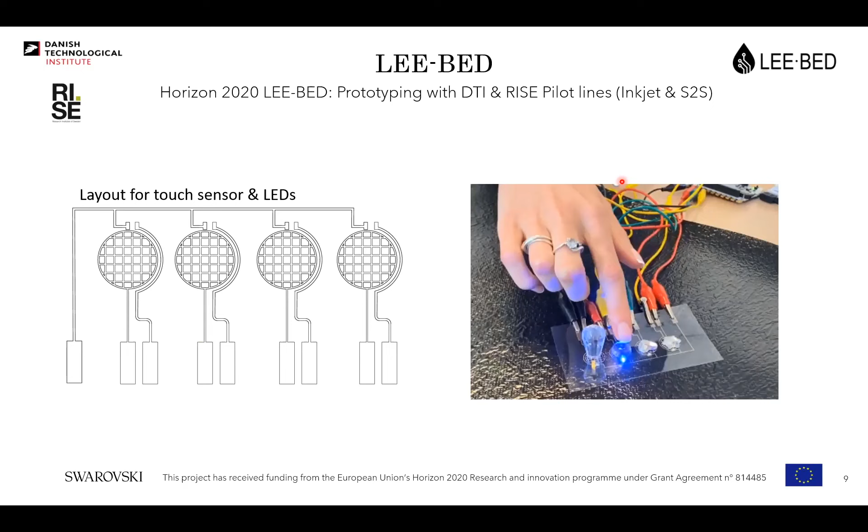One of the first things was that we thought about certain layouts for the touch sensor and the LEDs that need to be involved in such a system. We did some feasibility studies to find out which printing technology we would use, whether inkjet or sheet-to-sheet printing, and what kind of things are useful for us. We made first demonstrators out of that.

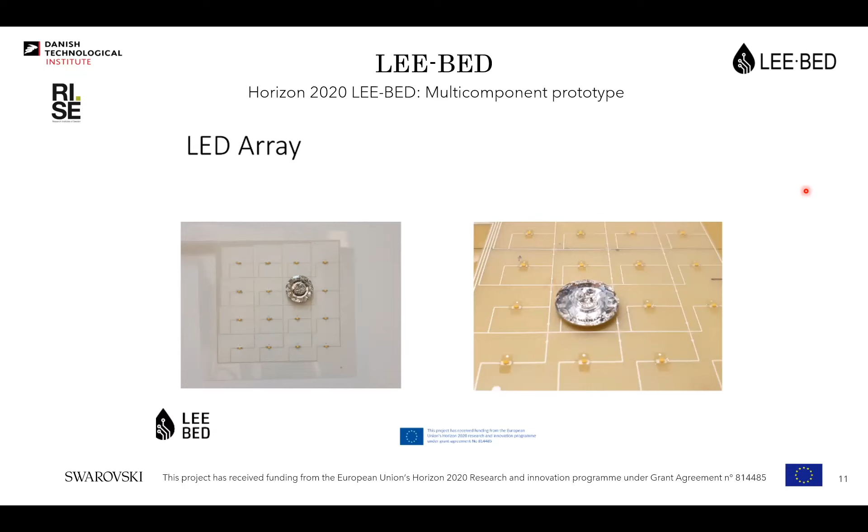As the journey continued, we went also for a 4x4 LED matrix. In this LED array, we had studies where we really looked at how the interaction with the crystal could look like, how well it lights up, and whether we could really showcase this interaction with the LED matrix. The colleagues from the research institutions mainly investigated the issue of transparency with silver nanowires.

Yes, please. Oh, you just dropped out, but now I can hear you again. Sorry, okay, no problem, maybe some connection issue.

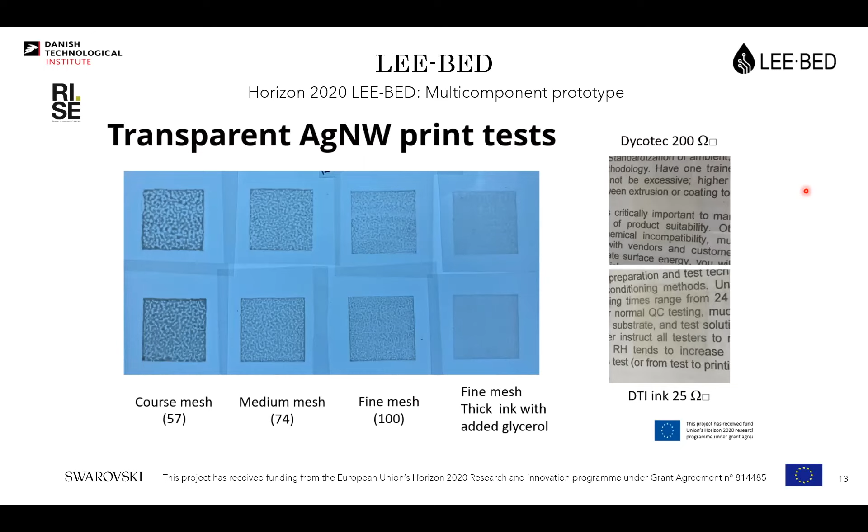What you wanted to explain is that the colleagues went for different approaches to achieve this transparency, and they benchmarked themselves against available solutions from the market. They benchmarked against the resistivity already available, analyzed in detail what kind of structures we also get in terms of this print, which has an effect on transparency and the visual effect, and they optimized all the way along to find solutions that suit our use case best.

What is quite nice to see here is this effect of what has been achieved so far. One second, I think the... whoopala.

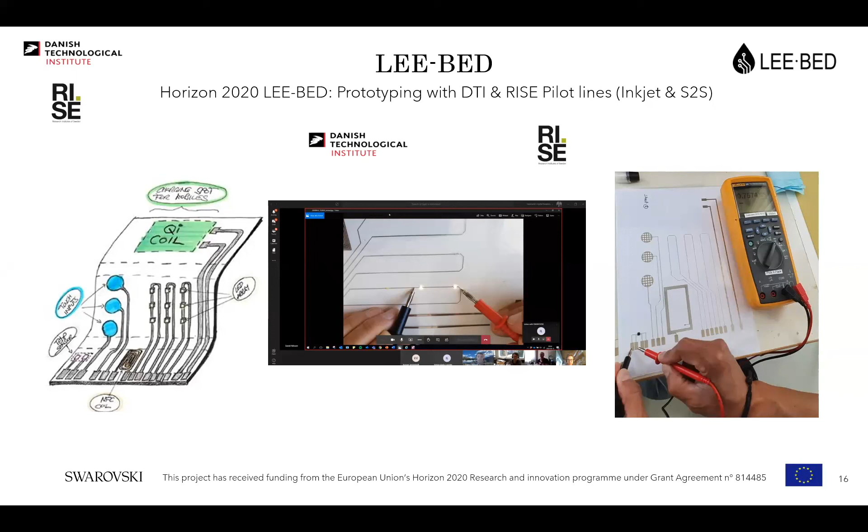There was a lot of space for creativity there. We started really drawing by hand, afterwards we did CAD designs. We tested a lot, did test prints, characterized with the help of the test bed what we got there, and took it into our lab to do measurements to verify what we have.

Afterwards, we had first installations, test setups at Swarovski internally. You see these very provisional first test setups where we just explored what we can actually do with all these technologies. This was also one intermediary step where we looked into it in these terms: what can we put there, how can we interact with the crystal, how can we use one of the crystals to steer maybe the thing, what kind of combinations are possible from the demo board point of view, and what we can achieve there.

And as you see, there's already a printed NFC coil on that. We experimented also with a QI charger there, with a temperature sensor, a thermocouple. So much more functionalities will be involved.

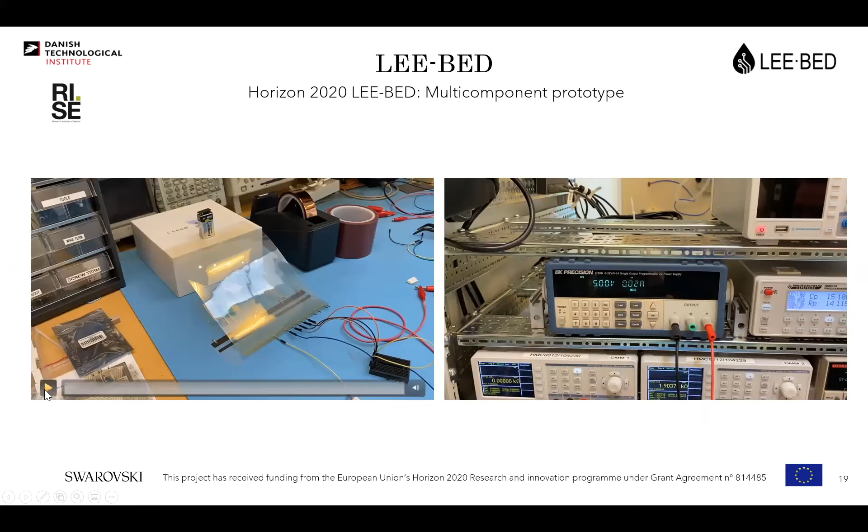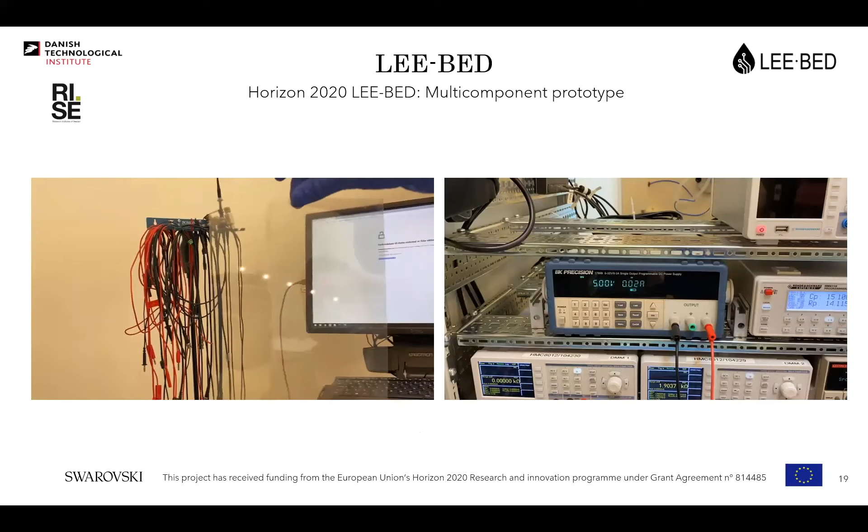And also here, we already started applying the transparency effect. So you see colleagues here in the lab - this is on DTI side, testing. Testing really lab-wise: how good is the transparency? And you see, it's really actually good. Yes, you can completely see through it.

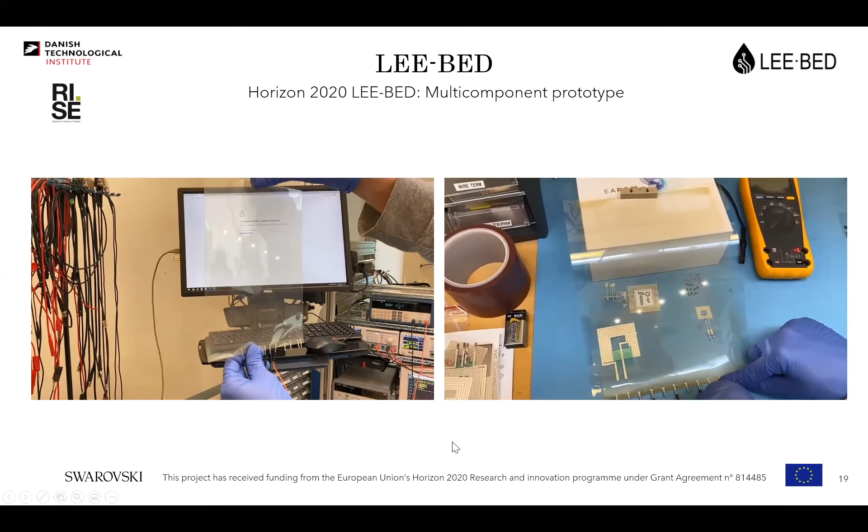As we did here with measurements, you see even other components - you can see even the other printed components through the first component. Yeah, so it's quite nice. We are connecting, disconnecting the LEDs here in this case, just to showcase that this works.

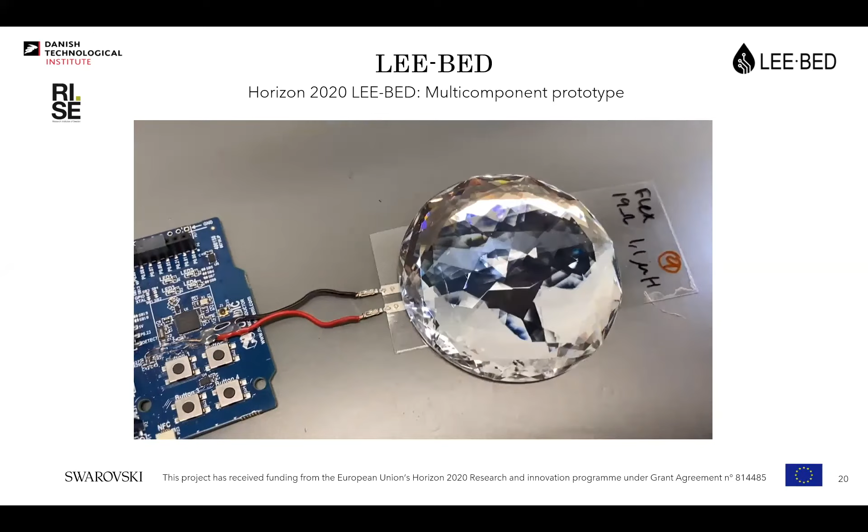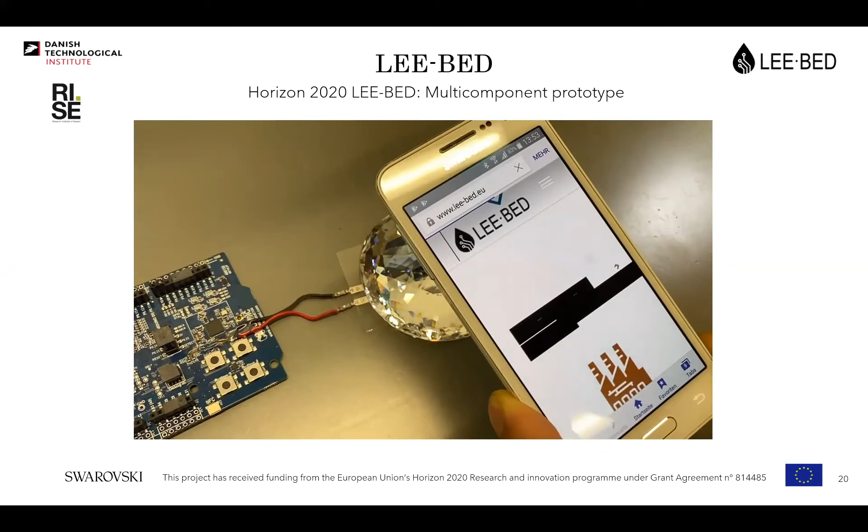And as I promised, we looked also in other functionalities. The other functionalities, for instance, involve NFC for also data interaction, or more, let's say, user interaction. We have a typical NFC demo board - it's a printed NFC coil. We put our crystal on top with a specific coating again, and that allows us to transmit the signal. And as you see, with enabled NFC, we land at our LEE-BED page, where hopefully you also will land soon and then apply maybe for your projects. So yeah, this is really nice.

The third case, as I promised, this lies quite in the sweet spot of our very typical interest, let's say in jewelry, but in the direction of smart jewelry. So actually, it's about the smart ring, and here we work strongly with one of the LEE-BED partners, with TNO.

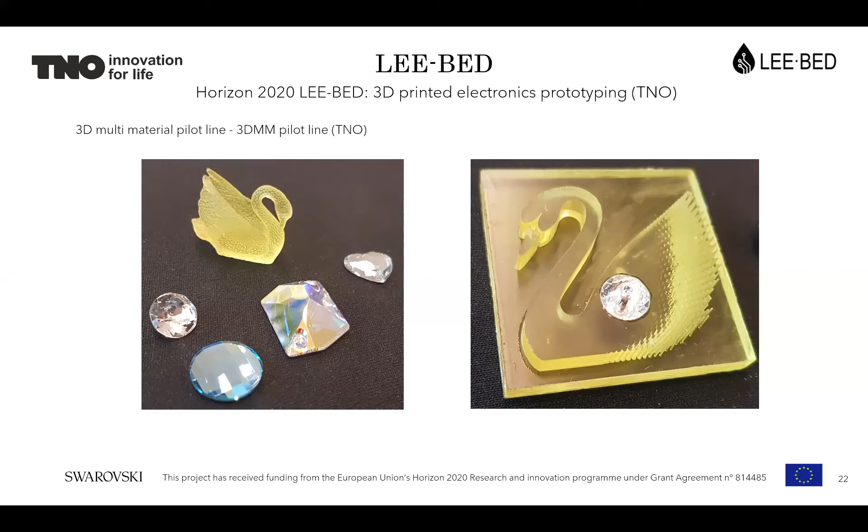First of all, we tested simply how to embed our crystals into their 3D materials - that was one of the first steps. Afterwards, we did test prints with their 3D multi-material pilot line, what they have there available also for you to test. And you see, one of the first steps was really to create kind of a test shape with still a board, a classical PCB FR4 board, coupled just to the touch sensitive part, and also the electrode that was printed. This just again was a proof of concept, just to show this works.

And after we have shown we can use this, we can also achieve some 3D print that really is conductive, with certain properties that are necessary. Then we moved on into designing a test structure, and in these terms, it is a test structure in form of a ring.

As you see, that involves also a crystal. Here we have a little bit of a look inside of this classical 3D print. It really reminds us of classical 3D printing with all the supporting structures that are necessary to hold it.

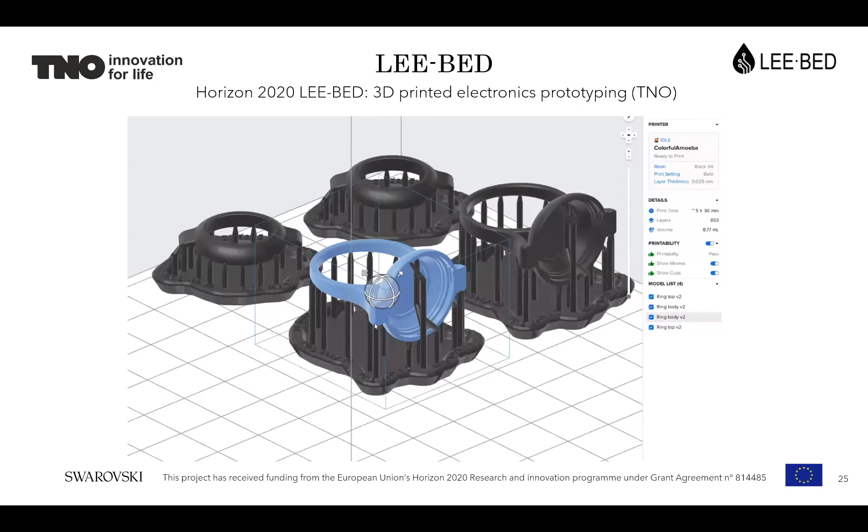And what's the interesting part about this is obviously that the 3D printed tracks are already involved in the parts. We have also a proper battery holder for this. There is an LED involved, a touch sensor, and the electronics that we have seen before on the PCB board here is now printed. And the components that can't be printed are assembled during the two-phase printing process with this electronics already, and it serves really to prototype a smart product in a very customizable way, which might be really a benefit of this technology in future, enabling much more customization.

And if you can imagine a use case like a ring, it easily indicates why it's useful, mainly for something where you need a sensor very close to skin, for instance, but you have very different shapes of fingers, and to make a close junction there, this technology might be very useful. So this is why we are exploring it with our partner TNO, and we are very happy to get this support.

And as you can imagine, one of the thoughts behind all this is obviously always that we use this opportunity, as our knowledge would not allow us to do this on our own. We also need help here from the experts.